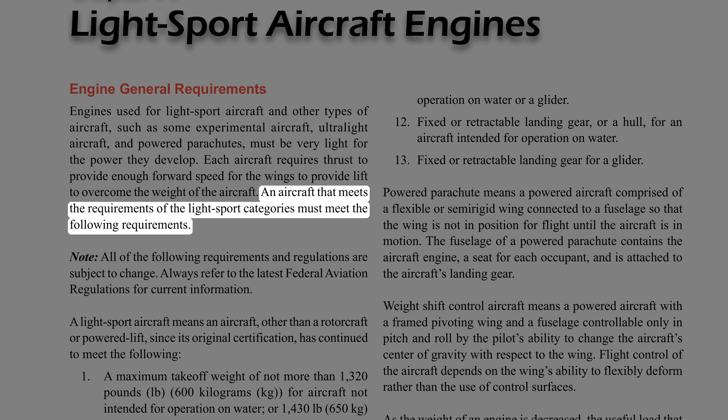Engine General Requirements. Engines used for light sport aircraft and other types of aircraft, such as some experimental aircraft, ultralight aircraft, and powered parachutes, must be very light for the power they develop. Each aircraft requires thrust to provide enough forward speed for the wings to provide lift to overcome the weight of the aircraft. An aircraft that meets the requirements of the light sport categories must meet the following requirements.

Note: all of the following requirements and regulations are subject to change. Always refer to the latest federal aviation regulations for current information.

A light sport aircraft means an aircraft, other than a rotorcraft or powered lift, since its original certification, has continued to meet the following. A maximum takeoff weight of not more than 1,320 pounds (600 kilograms) for aircraft not intended for operation on water, or 1,430 pounds (650 kilograms) for an aircraft intended for operation on water.

A maximum airspeed in level flight with maximum continuous power, VH, of not more than 120 knots calibrated airspeed (CAS), under standard atmospheric conditions at sea level. A maximum never exceed speed, VNE, of not more than 120 knots CAS for a glider. A maximum stalling speed or minimum steady flight speed without the use of lift-enhancing devices, VS1, of not more than 45 knots CAS at the aircraft's maximum certificated takeoff weight and most critical center of gravity.

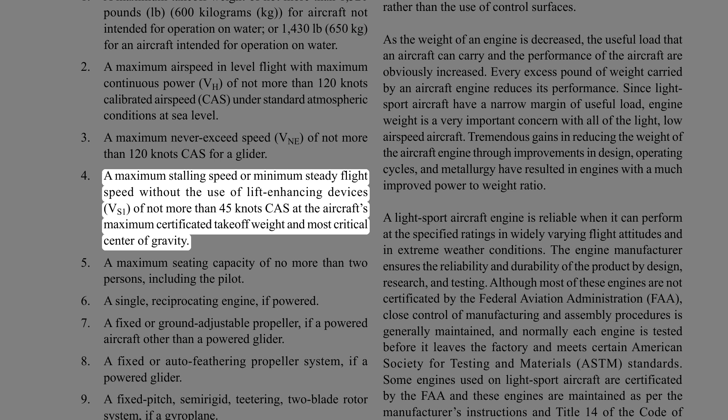A maximum seating capacity of no more than 2 persons, including the pilot. A single, reciprocating engine, if powered. A fixed or ground-adjustable propeller, if a powered aircraft other than a powered glider. A fixed or auto-feathering propeller system, if a powered glider. A fixed pitch, semi-rigid, teetering, 2-blade rotor system, if a gyroplane.

A non-pressurized cabin, if equipped with a cabin. Fixed landing gear, except for an aircraft intended for operation on water or a glider. Fixed or retractable landing gear, or a hull, for an aircraft intended for operation on water. Fixed or retractable landing gear for a glider.

Powered parachute means a powered aircraft comprised of a flexible or semi-rigid wing connected to a fuselage so that the wing is not in position for flight until the aircraft is in motion. The fuselage of a powered parachute contains the aircraft engine, a seat for each occupant, and is attached to the aircraft's landing gear.

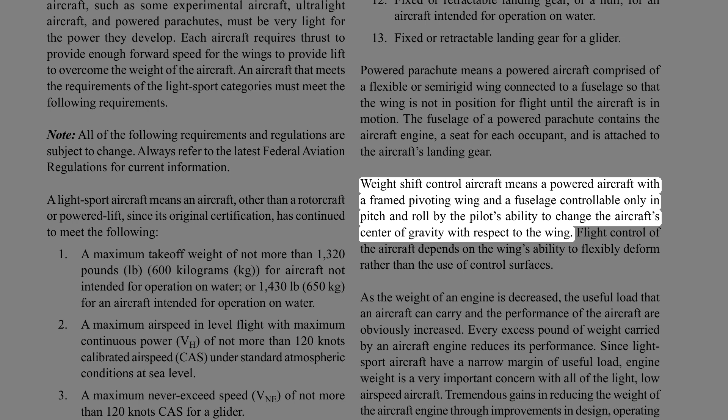Weight shift control aircraft means a powered aircraft with a framed pivoting wing and a fuselage controllable only in pitch and roll by the pilot's ability to change the aircraft's center of gravity with respect to the wing. Flight control of the aircraft depends on the wing's ability to flexibly deform rather than the use of control surfaces.

As the weight of an engine is decreased, the useful load that an aircraft can carry and the performance of the aircraft are obviously increased. Every excess pound of weight carried by an aircraft engine reduces its performance. Since light sport aircraft have a narrow margin of useful load, engine weight is a very important concern with all of the light, low airspeed aircraft.

Tremendous gains in reducing the weight of the aircraft engine through improvements in design, operating cycles, and metallurgy have resulted in engines with a much improved power-to-weight ratio.

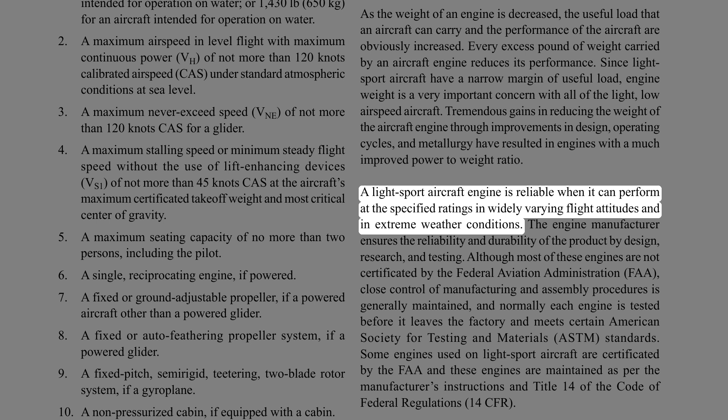A light sport aircraft engine is reliable when it can perform at the specified ratings in widely varying flight attitudes and in extreme weather conditions. The engine manufacturer ensures the reliability and durability of the product by design, research, and testing.

Although most of these engines are not certificated by the Federal Aviation Administration (FAA), close control of manufacturing and assembly procedures is generally maintained, and normally each engine is tested before it leaves the factory and meets certain American Society for Testing and Materials (ASTM) standards. Some engines used on light sport aircraft are certificated by the FAA, and these engines are maintained as per the manufacturer's instructions and Title 14 of the Code of Federal Regulations (14 CFR).

Most light sport engines require a definite time interval between overhauls. This is specified or implied by the engine manufacturer. The time between overhauls (TBO) varies with the type of engine, cycle, operating conditions such as engine temperatures, amount of time the engine is operated at high power settings, and the maintenance received. After reaching the time limit, the engine has to be overhauled. Sometimes this requires the engine to be shipped to an authorized manufacturer's overhaul facility.

One consideration when selecting a light sport engine is the shape, size, and number of cylinders of the engine. Since these engines range from single-cylinder to multi-cylinder engines, the mounting in the airframe is important to maintain the view of the pilot, aircraft center of gravity, and to reduce aircraft drag.

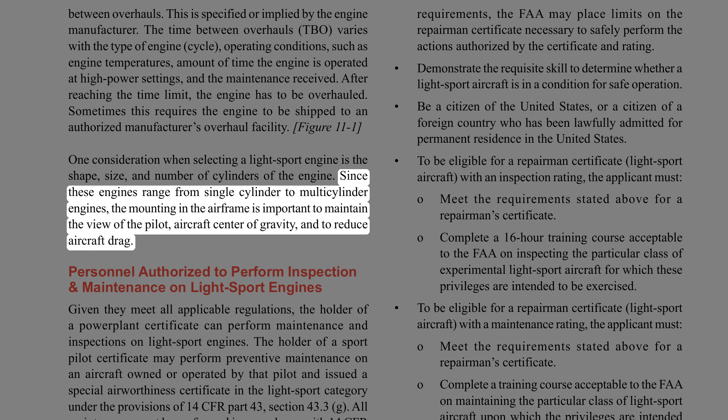Personnel authorized to perform inspection and maintenance on light sport engines: given they meet all applicable regulations, the holder of a Powerplant certificate can perform maintenance and inspections on light sport engines.

The holder of a Sport Pilot certificate may perform preventive maintenance on an aircraft owned or operated by that pilot and issued a special airworthiness certificate in the light sport category under the provisions of 14 CFR Part 43, Section 43.3, G. All maintenance must be performed in accordance with 14 CFR Part 65, Section 65.81, which describes specific experience requirements and current instructions for performing maintenance.

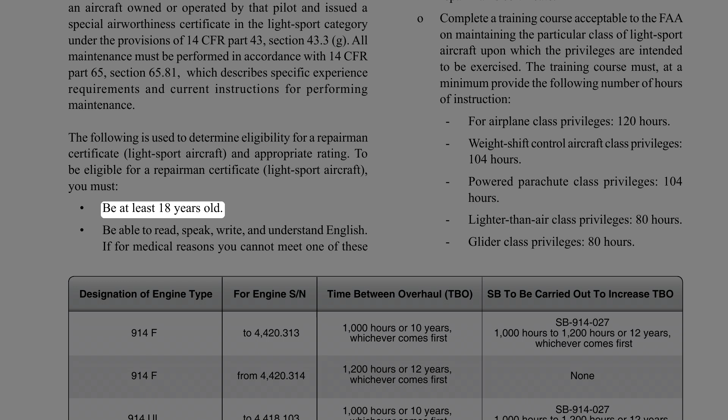The following is used to determine eligibility for a repairman certificate, light sport aircraft, and appropriate rating. To be eligible, you must be at least 18 years old, and be able to read, speak, write, and understand English. If for medical reasons you cannot meet one of these requirements, the FAA may place limits on the repairman certificate necessary to safely perform the actions authorized by the certificate and rating.

Demonstrate the requisite skill to determine whether a light sport aircraft is in a condition for safe operation. Be a citizen of the United States, or a citizen of a foreign country who has been lawfully admitted for permanent residence in the United States.

To be eligible for a repairman certificate, light sport aircraft, with an inspection rating, the applicant must meet the requirements stated above for a repairman's certificate, and complete a 16-hour training course acceptable to the FAA on inspecting the particular class of experimental light sport aircraft for which these privileges are intended to be exercised.

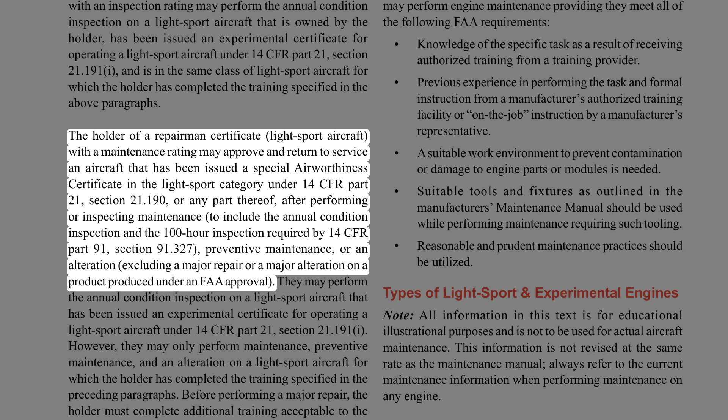The holder of a repairman certificate, light sport aircraft, with a maintenance rating may approve and return to service an aircraft that has been issued a special airworthiness certificate in the light sport category under 14 CFR Part 21, Section 21.190, or any part thereof, after performing or inspecting maintenance, to include the annual condition inspection and the 100-hour inspection required by 14 CFR Part 91, Section 91.327, preventive maintenance, or an alteration, excluding a major repair or a major alteration on a product produced under an FAA approval.

They may perform the annual condition inspection on a light sport aircraft that has been issued an experimental certificate for operating a light sport aircraft under 14 CFR Part 21, Section 21.191, I. However, they may only perform maintenance, preventive maintenance, and an alteration on a light sport aircraft for which the holder has completed the training specified in the preceding paragraphs.

Before performing a major repair, the holder must complete additional training acceptable to the FAA and appropriate to the repair performed. The holder of a repairman certificate, light sport aircraft, with a maintenance rating may not approve for return to service any aircraft or part thereof unless that person has previously performed the work concerned satisfactorily.

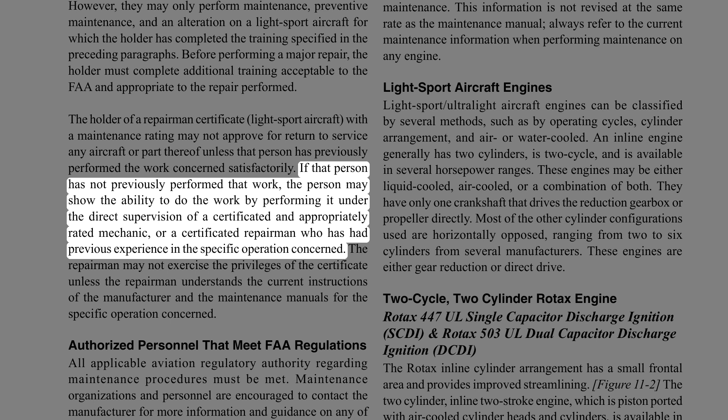If that person has not previously performed that work, the person may show the ability to do the work by performing it under the direct supervision of a certificated and appropriately rated mechanic, or a certificated repairman who has had previous experience in the specific operation concerned. The repairman may not exercise the privileges of the certificate unless the repairman understands the current instructions of the manufacturer and the maintenance manuals for the specific operation concerned.

Authorized personnel must meet FAA regulations. All applicable aviation regulatory authority regarding maintenance procedures must be met. Maintenance organizations and personnel are encouraged to contact the manufacturer for more information and guidance on any of the maintenance procedures. It is a requirement that every individual or maintenance provider possess the required special tooling, training, or experience to perform all tasks outlined.

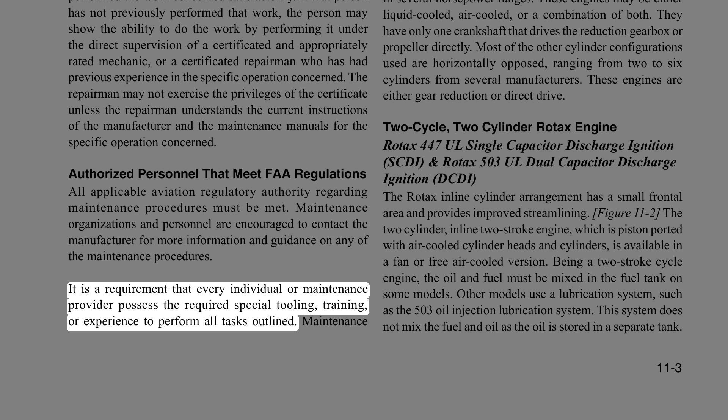Providers that meet the following conditions may perform engine maintenance providing they meet all of the following FAA requirements: knowledge of the specific task as a result of receiving authorized training from a training provider; previous experience in performing the task and formal instruction from a manufacturer's authorized training facility or on-the-job instruction by a manufacturer's representative; a suitable work environment to prevent contamination or damage to engine parts or modules; suitable tools and fixtures as outlined in the manufacturer's maintenance manual; and reasonable and prudent maintenance practices should be utilized.

Types of light sport and experimental engines.

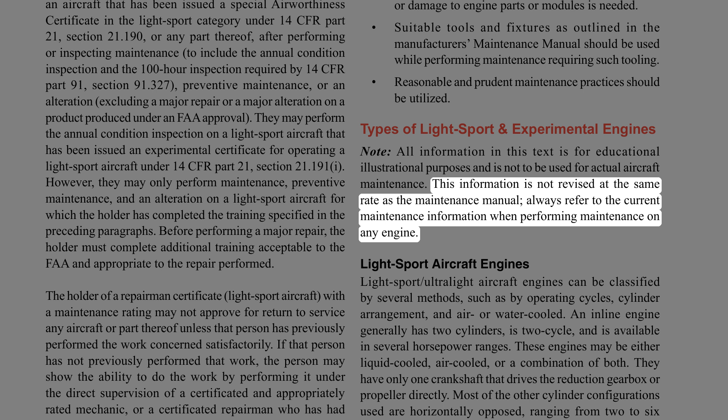Light sport aircraft engines. Light sport and ultralight aircraft engines can be classified by several methods, such as by operating cycles, cylinder arrangement, and air or water-cooled.

An inline engine generally has 2 cylinders, is 2-cycle, and is available in several horsepower ranges. These engines may be either liquid-cooled, air-cooled, or a combination of both. They have only one crankshaft that drives the reduction gearbox or propeller directly.

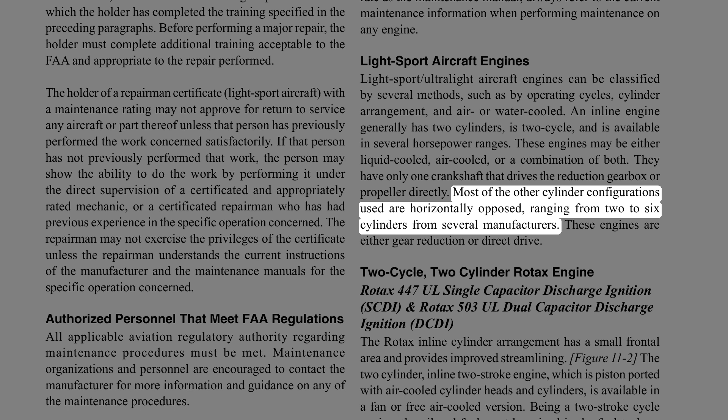Most of the other cylinder configurations used are horizontally opposed, ranging from 2 to 6 cylinders from several manufacturers. These engines are either gear reduction or direct drive.

2-cycle, 2-cylinder Rotax engine: Rotax 447 UL single capacitor discharge ignition (SCDI), and Rotax 503 UL dual capacitor discharge ignition (DCDI). The Rotax inline cylinder arrangement has a small frontal area and provides improved streamlining.

The 2-cylinder, inline 2-stroke engine, which is piston-ported with air-cooled cylinder heads and cylinders, is available in a fan or free air-cooled version. Being a 2-stroke cycle engine, the oil and fuel must be mixed in the fuel tank on some models.

Other models use a lubrication system, such as the 503 oil injection lubrication system. This system does not mix the fuel and oil, as the oil is stored in a separate tank. As the engine needs lubrication, the oil is injected directly from this tank.

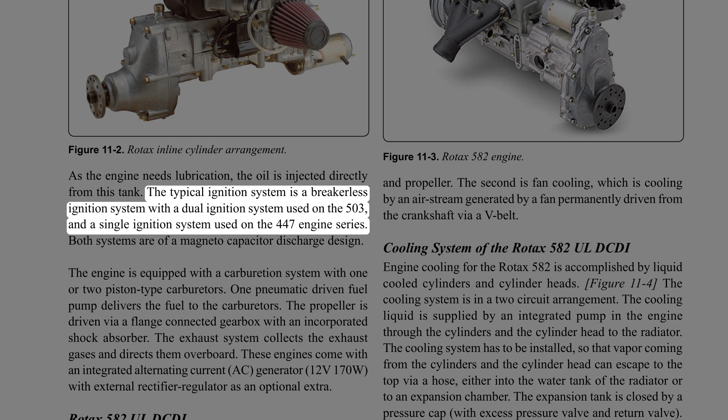The typical ignition system is a breakerless ignition system, with a dual ignition system used on the 503, and a single ignition system used on the 447 engine series. Both systems are of a magneto-capacitor discharge design.

The engine is equipped with a carburation system with 1 or 2 piston-type carburetors. One pneumatic-driven fuel pump delivers the fuel to the carburetors. The propeller is driven via a flange-connected gearbox with an incorporated shock absorber.

The exhaust system collects the exhaust gases and directs them overboard. These engines come with an integrated alternating current (AC) generator, 12V 170W, with an external rectifier regulator as an optional extra.

Rotax 582 UL DCDI. The Rotax 582 is a 2-stroke engine, 2-cylinder inline with rotary valve inlet, has liquid-cooled cylinder heads and cylinders that use an integrated water pump.

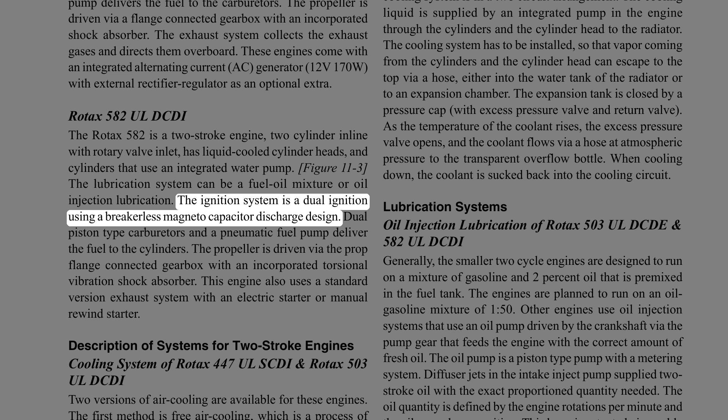The lubrication system can be a fuel oil mixture or oil injection lubrication. The ignition system is a dual ignition using a breakerless magneto-capacitor discharge design. Dual piston-type carburetors and a pneumatic fuel pump deliver the fuel to the cylinders.

The propeller is driven via the prop flange-connected gearbox with an incorporated torsional vibration shock absorber. This engine also uses a standard version exhaust system with an electric starter or manual rewind starter.

Description of systems for 2-stroke engines. Cooling system of Rotax 447 UL SCDI and Rotax 503 UL DCDI. 2 versions of air cooling are available for these engines.

The first method is free air cooling, which is a process of engine cooling by an airstream generated by aircraft speed and propeller. The second is fan cooling, which is cooling by an airstream generated by a fan permanently driven from the crankshaft via a V-belt.

Cooling system of the Rotax 582 UL DCDI. Engine cooling for the Rotax 582 is accomplished by liquid-cooled cylinders and cylinder heads. The cooling system is in a 2-circuit arrangement.

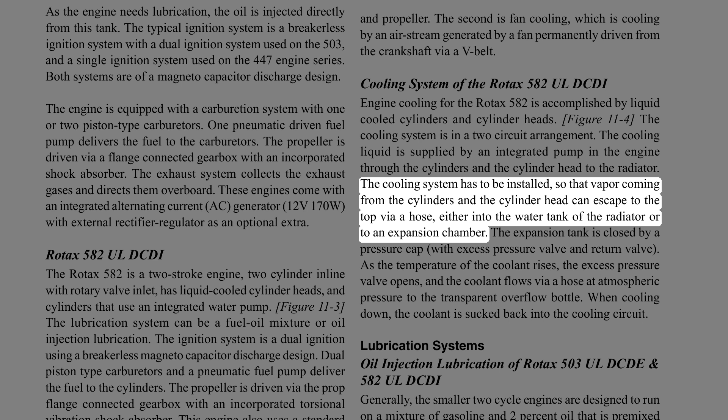The cooling liquid is supplied by an integrated pump in the engine through the cylinders and the cylinder head to the radiator. The cooling system has to be installed so that vapor coming from the cylinders and the cylinder head can escape to the top via a hose, either into the water tank of the radiator or to an expansion chamber. The expansion tank is closed by a pressure cap, with excess pressure valve and return valve.

As the temperature of the coolant rises, the excess pressure valve opens, and the coolant flows via hose at atmospheric pressure to the transparent overflow bottle. When cooling down, the coolant is sucked back into the cooling circuit.

Lubrication systems. Oil injection lubrication of Rotax 503 UL DCDI and 582 UL DCDI. Generally, the smaller 2-cycle engines are designed to run on a mixture of gasoline and 2% oil that is pre-mixed in the fuel tank. The engines are planned to run on an oil-gasoline mixture of 1:50.

Other engines use oil injection systems that use an oil pump driven by the crankshaft via the pump gear that feeds the engine with the correct amount of fresh oil. The oil pump is a piston-type pump with a metering system.

Diffuser jets in the intake inject pump-supplied two-stroke oil with the exact proportion quantity needed. The oil quantity is defined by the engine rotations per minute and the oil pump lever position. This lever is actuated via a cable connected to the throttle cable.

The oil comes to the pump from an oil tank by gravity. Note: in engines that use oil injection, the carburetors are fed with pure gasoline, not an oil-gasoline mixture.

The oil quantity in the oil tank must be checked before putting the engine into service, as the oil is consumed during operation and needs to be replenished.

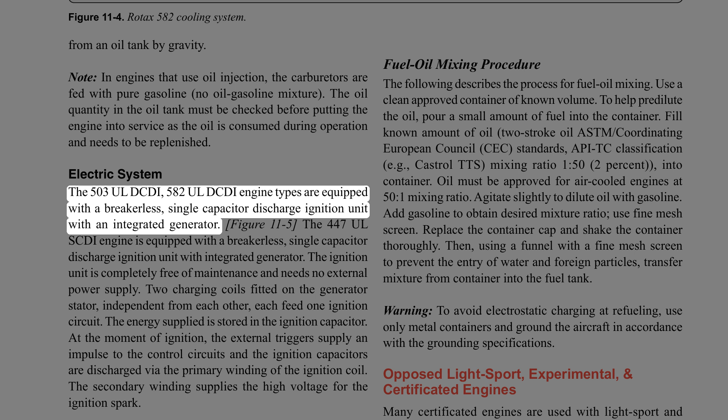Electric system. The 503 UL DCDI and 582 UL DCDI engine types are equipped with a breakerless, single capacitor discharge ignition unit with an integrated generator. The 447 UL SCDI engine is equipped with a breakerless, single capacitor discharge ignition unit with integrated generator.

The ignition unit is completely free of maintenance and needs no external power supply. Two charging coils fitted on the generator stator, independent from each other, each feed one ignition circuit. The energy supplied is stored in the ignition capacitor. At the moment of ignition, the external triggers supply an impulse to the control circuits and the ignition capacitors are discharged via the primary winding of the ignition coil. The secondary winding supplies the high voltage for the ignition spark.

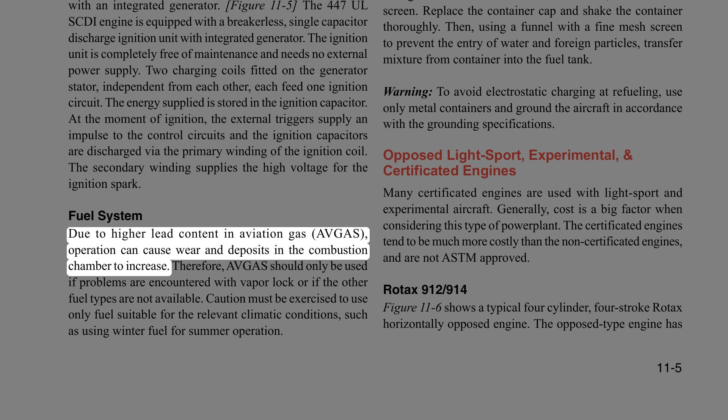Fuel system. Due to higher lead content in aviation gas, avgas operation can cause wear and deposits in the combustion chamber to increase. Therefore, avgas should only be used if problems are encountered with vapor lock or if the other fuel types are not available. Caution must be exercised to use only fuel suitable for the relevant climatic conditions, such as using winter fuel for summer operation.

Fuel oil mixing procedure. The following describes the process for fuel oil mixing. Use a clean approved container of known volume. To help predilute the oil, pour a small amount of fuel into the container. Fill a known amount of oil, two-stroke oil meeting ASTM, Coordinating European Council (CEC), and API TC classification standards, e.g., Castrol TTS, mixing ratio 1:50, 2 percent, into the container. Oil must be approved for air-cooled engines at a 50:1 mixing ratio.

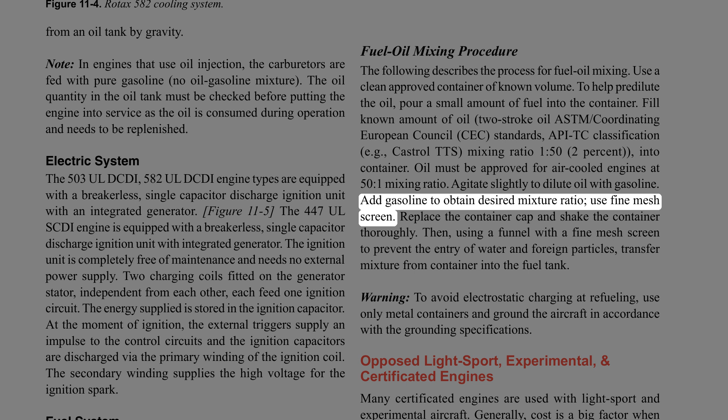Agitate slightly to dilute oil with gasoline. Add gasoline to obtain the desired mixture ratio. Replace the container cap and shake the container thoroughly. Then, using a funnel with a fine mesh screen to prevent the entry of water and foreign particles, transfer the mixture from the container into the fuel tank.

Warning: to avoid electrostatic charging at refueling, use only metal containers and ground the aircraft in accordance with the grounding specifications. Opposed light sport, experimental, and certificated engines.

Many certificated engines are used with light sport and experimental aircraft. Generally, cost is a big factor when considering this type of power plant. The certificated engines tend to be much more costly than the non-certificated engines, and are not ASTM approved.

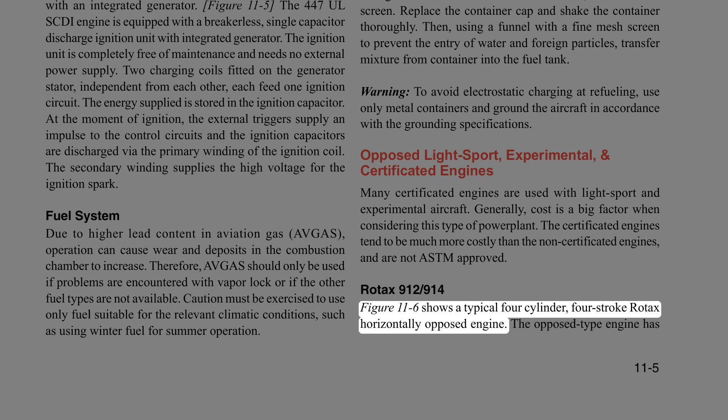Rotax 912-914. Figure 11-6 shows a typical 4-cylinder, 4-stroke Rotax horizontally opposed engine.

The opposed type engine has two banks of cylinders directly opposite each other with a crankshaft in the center. The pistons of both cylinder banks are connected to the single crankshaft. The engine cylinder heads are both liquid-cooled and air-cooled. The air cooling is mostly used on the cylinder. It is generally mounted with the cylinders in a horizontal position.

The opposed type engine has a low weight to horsepower ratio, and its narrow silhouette makes it ideal for horizontal installation on the aircraft wings, for twin-engine applications. Another advantage is its low vibration characteristics. It is an ideal replacement for the Rotax 582 2-cylinder, 2-stroke engine, which powers many of the existing light aircraft, as it is the same weight as the Rotax 582.

These engines are ASTM approved for installation into light sport category aircraft, with some models being FAA certificated engines. Description of systems. Cooling system.

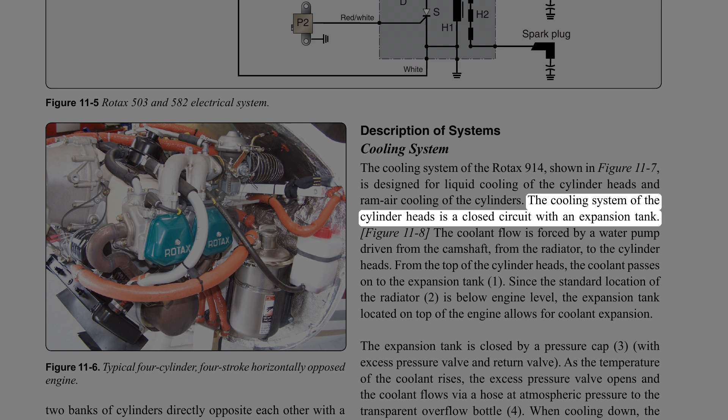The cooling system of the Rotax 914, shown in Figure 11-7, is designed for liquid cooling of the cylinder heads and ram air cooling of the cylinders. The cooling system of the cylinder heads is a closed circuit with an expansion tank. The coolant flow is forced by a water pump driven from the camshaft, from the radiator, to the cylinder heads. From the top of the cylinder heads, the coolant passes on to the expansion tank.

Since the standard location of the radiator (2) is below engine level, the expansion tank located on top of the engine allows for coolant expansion. The expansion tank is closed by a pressure cap (3) with excess pressure valve and return valve.

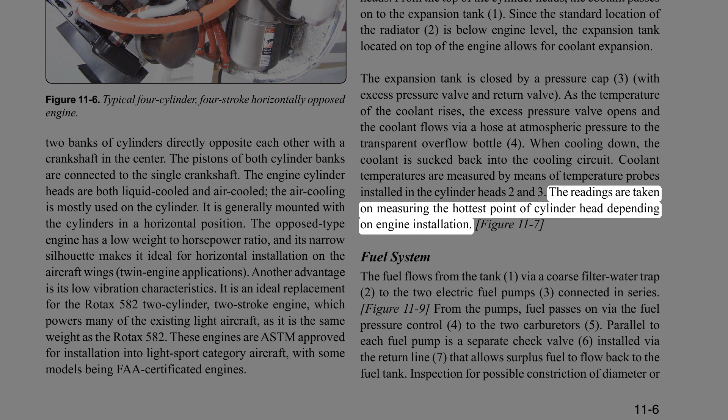As the temperature of the coolant rises, the excess pressure valve opens and the coolant flows via hose at atmospheric pressure to the transparent overflow bottle (4). When cooling down, the coolant is sucked back into the cooling circuit. Coolant temperatures are measured by means of temperature probes installed in the cylinder heads (2 and 3). The readings are taken measuring the hottest point of the cylinder head, depending on engine installation.

Fuel system. The fuel flows from the tank (1), via a coarse filter water trap (2), to the 2 electric fuel pumps (3), connected in series. From the pumps, fuel passes on via the fuel pressure control (4) to the 2 carburetors (5). Parallel to each fuel pump is a separate check valve (6), installed via the return line (7), that allows surplus fuel to flow back to the fuel tank.

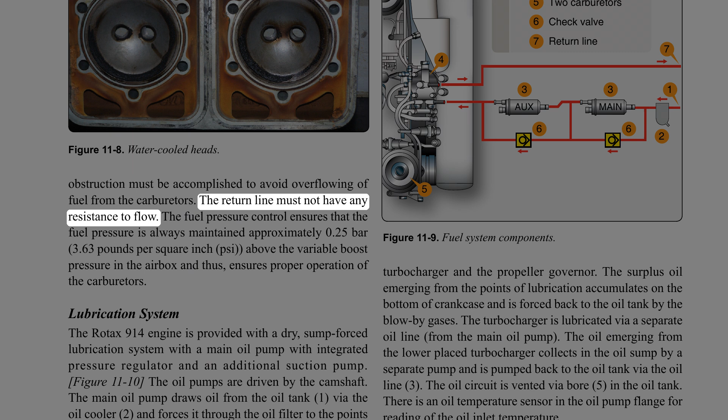Inspection for possible constriction of diameter or obstruction must be accomplished to avoid overflowing of fuel from the carburetors. The return line must not have any resistance to flow. The fuel pressure control ensures that the fuel pressure is always maintained approximately 0.25 bars, 3.63 psi, above the variable boost pressure in the airbox, thus ensuring proper operation of the carburetors.

Lubrication system: The Rotax 914 engine is provided with a dry-sump forced lubrication system with a main oil pump with an integrated pressure regulator and an additional suction pump. The oil pumps are driven by the camshaft. The main oil pump draws oil from the oil tank via the oil cooler and forces it through the oil filter to the points of lubrication. It also lubricates the plain bearings of the turbocharger and the propeller governor.

The surplus oil emerging from the points of lubrication accumulates on the bottom of the crankcase and is forced back to the oil tank by the blow-by gases. The turbocharger is lubricated via a separate oil line from the main oil pump. The oil emerging from the lower-placed turbocharger collects in the oil sump, is drawn by a separate pump, and is pumped back to the oil tank via the oil line. The oil circuit is vented via a bore in the oil tank. There is an oil temperature sensor in the oil pump flange for reading the oil inlet temperature.

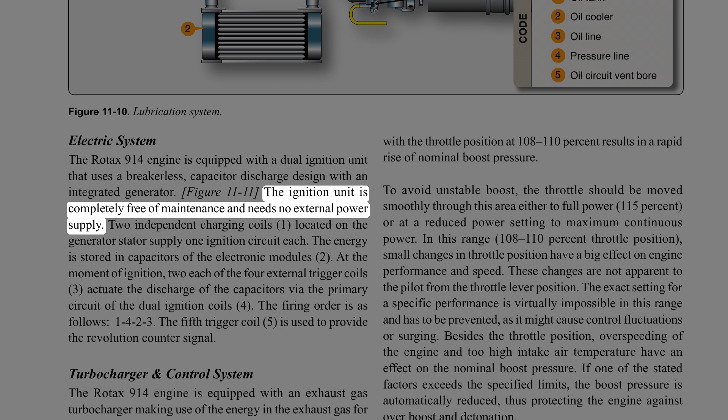Electric system: The Rotax 914 engine is equipped with a dual ignition unit that uses a breakerless, capacitor discharge design with an integrated generator. The ignition unit is completely free of maintenance and needs no external power supply. Two independent charging coils located on the generator stator supply one ignition circuit each. The energy is stored in capacitors of the electronic modules.

At the moment of ignition, two of the four external trigger coils actuate the discharge of the capacitors via the primary circuit of the dual ignition coils. The firing order is 1, 4, 2, 3. The 5th trigger coil is used to provide the revolution counter signal.

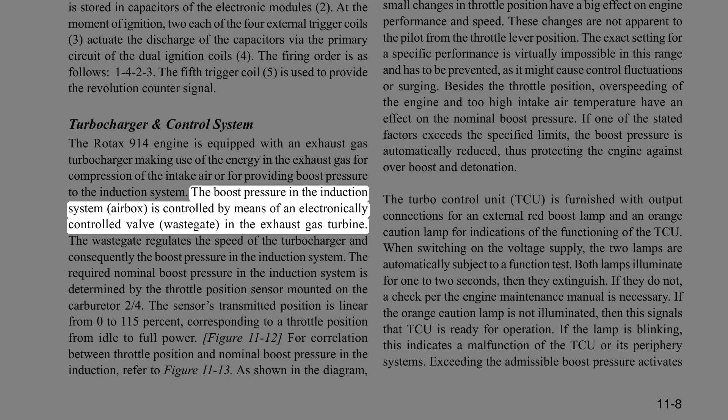Turbocharger and control system: The Rotax 914 engine is equipped with an exhaust gas turbocharger, making use of the energy in the exhaust gas for compression of the intake air or for providing boost pressure to the induction system. The boost pressure in the induction system, airbox, is controlled by means of an electronically controlled valve, the wastegate, in the exhaust gas turbine. The wastegate regulates the speed of the turbocharger and consequently the boost pressure in the induction system.

The required nominal boost pressure in the induction system is determined by the throttle position sensor mounted on the carburetor 2/4. The sensor's transmitted position is linear from 0 to 115%, corresponding to a throttle position from idle to full power. For correlation between throttle position and nominal boost pressure in the induction, refer to figure 11-13.

As shown in the diagram, with the throttle position at 108 to 110%, there is a rapid rise of nominal boost pressure. To avoid unstable boost, the throttle should be moved smoothly through this area, either to full power at 115%, or at a reduced power setting to maximum continuous power.

In this range, 108 to 110% throttle position, small changes in throttle position have a big effect on engine performance and speed. These changes are not apparent to the pilot from the throttle lever position. The exact setting for a specific performance is virtually impossible in this range and has to be prevented, as it might cause control fluctuations or surging.

Besides the throttle position, overspeeding of the engine and too high intake air temperature have an effect on the nominal boost pressure. If one of the stated factors exceeds the specified limits, the boost pressure is automatically reduced, thus protecting the engine against overboost and detonation.

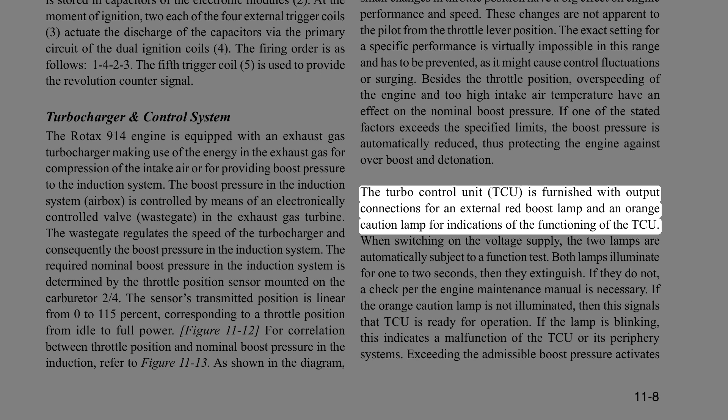The Turbo Control Unit, TCU, is furnished with output connections for an external red boost lamp and an orange caution lamp for indications of the functioning of the TCU. When switching on the voltage supply, the two lamps are automatically subject to a function test. Both lamps illuminate for 1 to 2 seconds, then they extinguish. If they do not, a check per the engine maintenance manual is necessary.

If the orange caution lamp is not illuminated, this signals that the TCU is ready for operation. If the lamp is blinking, this indicates a malfunction of the TCU or its periphery systems. Exceeding the admissible boost pressure activates and illuminates the red boost lamp continuously.

The TCU registers the time of full throttle operation, boost pressure. Full throttle operation for longer than 5 minutes, with the red boost light illuminated, makes the red boost lamp start blinking. The red boost lamp helps the pilot avoid full power operation for longer than 5 minutes, or the engine could be subject to thermal and mechanical overstress.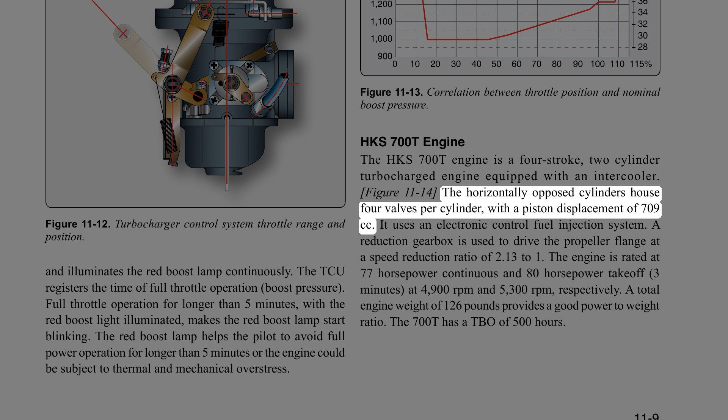The HKS 700T engine is a 4-stroke, 2-cylinder turbocharged engine equipped with an intercooler. The horizontally opposed cylinders house 4 valves per cylinder, with a piston displacement of 709 cc. It uses an electronic control fuel injection system.

A reduction gearbox drives the propeller flange at a speed reduction ratio of 2.13 to 1. The engine is rated at 77 horsepower continuous and 80 horsepower takeoff for 3 minutes, at 4,900 and 5,300 revolutions per minute respectively. A total engine weight of 126 pounds provides a good power-to-weight ratio. The 700T has a TBO of 500 hours.

Jabiru light sport engines are designed to be manufactured using the latest manufacturing techniques. All Jabiru engines are manufactured, assembled, and run on a dynamometer, then calibrated before delivery. The crankcase halves, cylinder heads, crankshaft, starter motor housings, gearbox cover, and the gearbox that powers the distributor rotors, together with many smaller components, are machined from solid material. The sump, or oil pan, is the only casting.

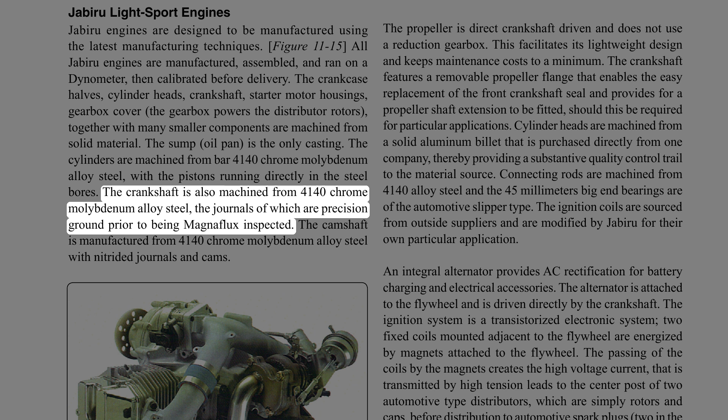The cylinders are machined from 4140 chrome molybdenum alloy steel bar, with the pistons running directly in the steel bores. The crankshaft is also machined from 4140 chrome molybdenum alloy steel, with journals precision ground prior to being Magnaflux inspected. The camshaft is manufactured from 4140 chrome molybdenum alloy steel with nitrided journals and cams.

The propeller is direct crankshaft driven and does not use a reduction gearbox. This facilitates its lightweight design and keeps maintenance costs to a minimum. The crankshaft features a removable propeller flange that enables easy replacement of the front crankshaft seal and allows a propeller shaft extension to be fitted, should this be required for particular applications.

Cylinder heads are machined from a solid aluminum billet purchased directly from one company, providing a substantive quality control trail to the material source. Connecting rods are machined from 4140 alloy steel, and the 45 mm big end bearings are of the automotive slipper type. The ignition coils are sourced from outside suppliers and are modified by Jabiru for their own particular application.

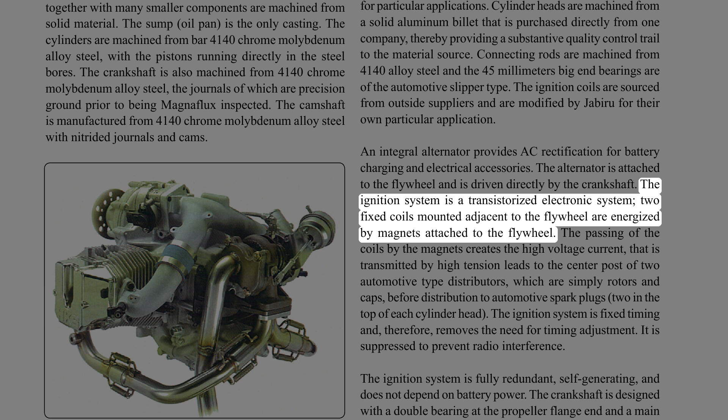An integral alternator provides AC rectification for battery charging and electrical accessories. The alternator is attached to the flywheel and is driven directly by the crankshaft. The ignition system is a transistorized electronic system. Two fixed coils mounted adjacent to the flywheel are energized by magnets attached to the flywheel.

The passing of the coils by the magnets creates the high voltage current that is transmitted by high tension leads to the center post of 2 automotive-type distributors, which are simply rotors and caps, before distribution to automotive spark plugs, 2 in the top of each cylinder head.

The ignition system has fixed timing and therefore removes the need for timing adjustment. It is suppressed to prevent radio interference. The ignition system is fully redundant, self-generating, and does not depend on battery power.

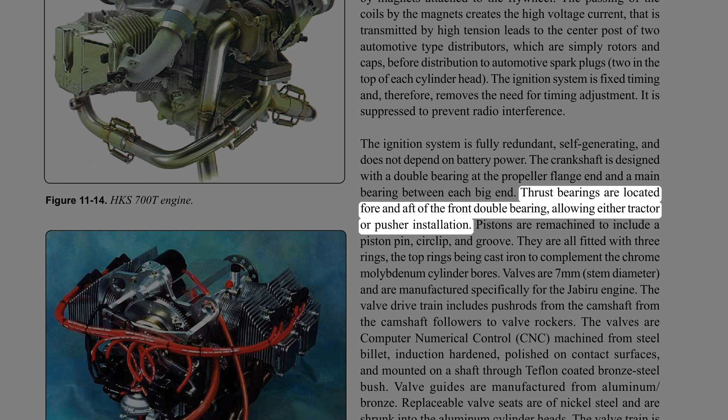The crankshaft is designed with a double bearing at the propeller flange end and a main bearing between each big end. Thrust bearings are located fore and aft of the front double bearing, allowing either tractor or pusher installation. Pistons are machined to include a piston pin, circlip, and groove. They are all fitted with 3 rings, the top rings being cast iron to complement the chrome molybdenum cylinder bores.

Valves are 7 mm stem diameter and are manufactured specifically for the Jabiru engine. The valve drive train includes push rods from the camshaft followers to valve rockers. The valves are CNC machined from steel billet, induction hardened, polished on contact surfaces, and mounted on a shaft through a Teflon-coated bronze steel bush.

Valve guides are manufactured from aluminum bronze. Replaceable valve seats are of nickel steel and are shrunk into the aluminum cylinder heads. The valve train is lubricated from the oil gallery.

Engines use hydraulic lifters that automatically adjust valve clearance. An internal gear pump is driven directly by the camshaft and provides engine lubrication via an oil circuit that includes an automotive spin-on filter, oil cooler, and built-in relief valve.

The standard engines are supplied with 2 ram air cooling ducts developed by Jabiru to facilitate cooling of the engine by directing air from the propeller to the critical areas of the engine, particularly the cylinder heads and barrels. The use of these ducts removes the need to design and manufacture baffles and establish a plenum chamber, which is the traditional method of cooling air-cooled aircraft engines.

The fact that these baffles and plenum chambers are not required also ensures a cleaner engine installation, which in turn facilitates maintenance and inspection of the engine and its components. The engine is fitted with a 1.5 kilowatt starter motor, also manufactured by Jabiru, providing very effective starting. The engine has a very low vibration level; however, it is also supported by 4 large rubber shock mounts attached to the engine mounts at the rear of the engine.

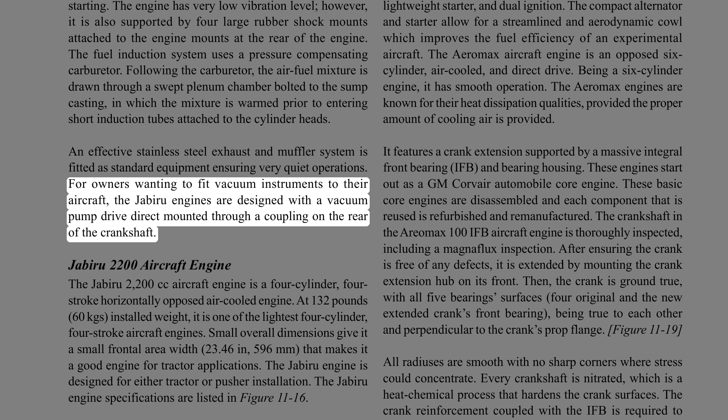Jabiru 2200 aircraft engine. The Jabiru 2200cc aircraft engine is a 4-cylinder, 4-stroke, horizontally opposed, air-cooled engine. At 132 pounds (60 kgs) installed weight, it is one of the lightest 4-cylinder, 4-stroke aircraft engines. Small overall dimensions give it a small frontal area, width 23.46 in (596 mm), making it a good engine for tractor applications. The Jabiru engine is designed for either tractor or pusher installation. The Jabiru engine specifications are listed in Figure 11-16.

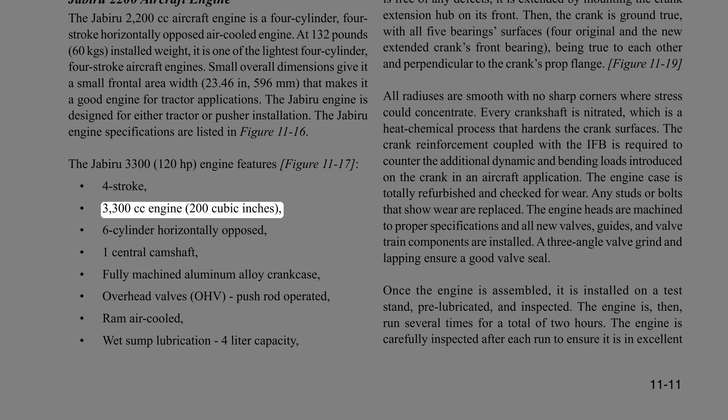The Jabiru 3300, 120 horsepower engine features, Figure 11-17: 4-stroke, 3300cc engine, 200 cubic inches, 6-cylinder horizontally opposed, one central camshaft, fully machined aluminum alloy crankcase, overhead valves (OHV), pushrod operated, ram air-cooled, wet sump lubrication with 4-liter capacity, direct propeller drive, dual transistorized magneto ignition, integrated AC generator, electric starter, mechanical fuel pump, and naturally aspirated, single pressure compensating carburetor.

Aeromax Aviation 100 IFB aircraft engine. Aeromax Aviation produces a version of a 100 horsepower engine called the Integral Front Bearing. The engine features a specially made integral front bearing, Figure 11-18. It uses an integral permanent magnet 35 amp alternator, lightweight starter, and dual ignition. The compact alternator and starter allow for a streamlined and aerodynamic cowl, which improves the fuel efficiency of an experimental aircraft.

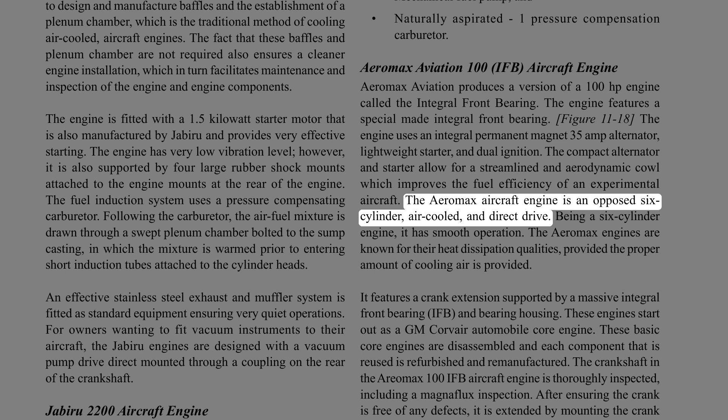The Aeromax aircraft engine is an opposed 6-cylinder, air-cooled, direct drive engine. Being a 6-cylinder engine, it has smooth operation. The Aeromax engines are known for their heat dissipation qualities, provided the proper amount of cooling air is supplied. It features a crank extension supported by a massive Integral Front Bearing (IFB) and bearing housing.

These engines start out as a GM Corvair automobile core engine. These basic core engines are disassembled, and each component that is reused is refurbished and remanufactured. The crankshaft in the Aeromax 100 IFB aircraft engine is thoroughly inspected, including a Magnaflux inspection.

After ensuring the crank is free of any defects, it is extended by mounting the crank extension hub on its front. Then the crank is ground true, with all 5 bearing surfaces - 4 original and the new extended crank's front bearing - true to each other and perpendicular to the crank's prop flange. Figure 11-19. All radiuses are smooth with no sharp corners where stress could concentrate. Every crankshaft is nitrided, a heat chemical process that hardens the crank surfaces. This crank reinforcement, coupled with the IFB, is required to counter the additional dynamic and bending loads introduced on the crank in an aircraft application.

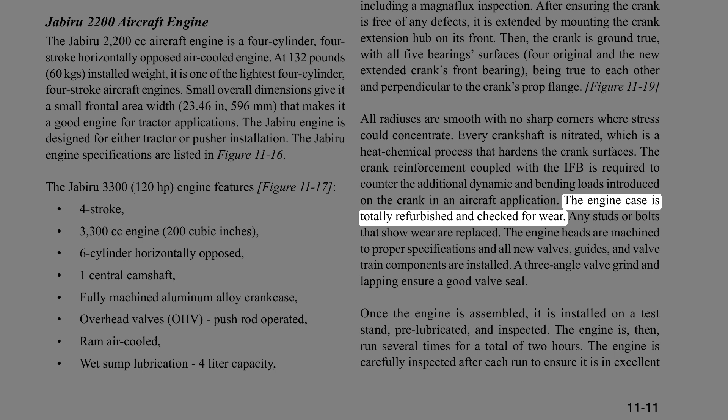The engine case is totally refurbished and checked for wear. Any studs or bolts that show wear are replaced. The engine heads are machined to proper specifications, and all new valves, guides, and valve train components are installed. A 3-angle valve grind and lapping ensure a good valve seal.

Once the engine is assembled, it is installed on a test stand, pre-lubricated, and inspected. The engine is then run several times for a total of 2 hours, carefully inspected after each run to ensure it is in excellent operating condition. At the end of test running, the oil filter is removed and cut for inspection, and its internal condition is recorded. This process is documented and kept on file for each individual engine.

Once the engine's proper performance is assured, it is removed and packaged in a custom-built crate for shipping. Each engine is shipped with its engine service and operations manual, which contains information pertaining to installation, break-in, testing, tune-up, troubleshooting, repair, and inspection procedures. The specifications for the Aeromax 100 engine are outlined in Figure 11-20.

Direct drive VW engines: Revmaster R2300 engine. The Revmaster R2300 engine maintains Revmaster's systems and parts, including its RM049 heads that feature large fins and a hemispherical combustion chamber. It maintains the earlier R2200 engine's top horsepower of 82 at 2,950 RPM continuous. Takeoff power is rated at 85 horsepower at 3,350 RPM.

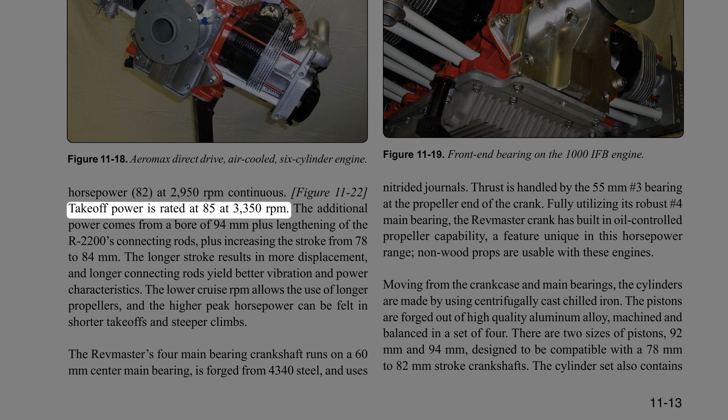The additional power comes from a bore of 94mm, plus lengthening of the R2200's connecting rods, plus increasing the stroke from 78 to 84mm. The longer stroke results in more displacement, and longer connecting rods yield better vibration and power characteristics. The lower cruise RPM allows the use of longer propellers, and the higher peak horsepower can be felt in shorter takeoffs and steeper climbs.

The Revmaster's 4-main bearing crankshaft runs on a 60 mm center main bearing, is forged from 4340 steel, and uses nitrided journals. Thrust is handled by the 55 mm number 3 bearing at the propeller end of the crank.

Fully utilizing its robust number 4 main bearing, the Revmaster crank has built-in oil-controlled propeller capability, a feature unique in this horsepower range. Non-wood props are usable with these engines.

Moving from the crankcase and main bearings, the cylinders are made using centrifugally cast chilled iron. The pistons are forged out of high-quality aluminum alloy, machined and balanced in a set of 4.

There are 2 sizes of pistons, 92 mm and 94 mm, designed to be compatible with 78 mm to 82 mm stroke crankshafts. The cylinder set also contains piston rings, wrist pins, and locks.

The direct drive R2300 uses a dual CDI ignition with 8-coil spark to 8 spark plugs, dual 20-amp alternators, an oil cooler, and its proprietary Rev-Flo carburetor, while introducing longer cylinders that do not require spacers.

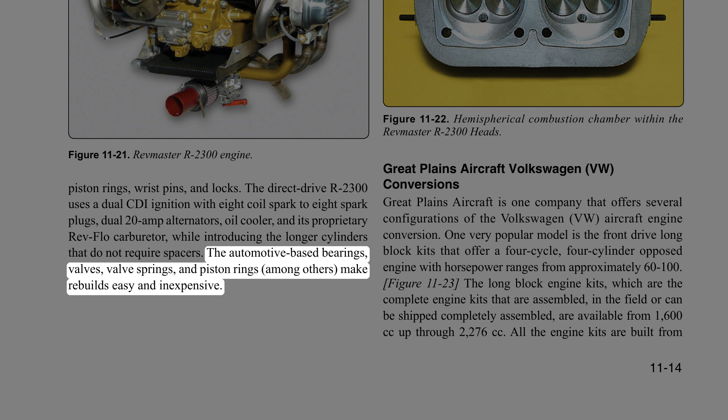The automotive-based bearings, valves, valve springs, and piston rings, among others, make rebuilds easy and inexpensive.

Great Plains Aircraft Volkswagen, VW, conversions.

Great Plains Aircraft is one company that offers several configurations of the Volkswagen, VW, aircraft engine conversion. One very popular model is the front-drive long block kit, offering a 4-cycle, 4-cylinder opposed engine with horsepower ranges from approximately 60 to 100.

The long block engine kits, which are complete engine kits that are assembled in the field or can be shipped completely assembled, are available from 1,600 cc up through 2,276 cc.

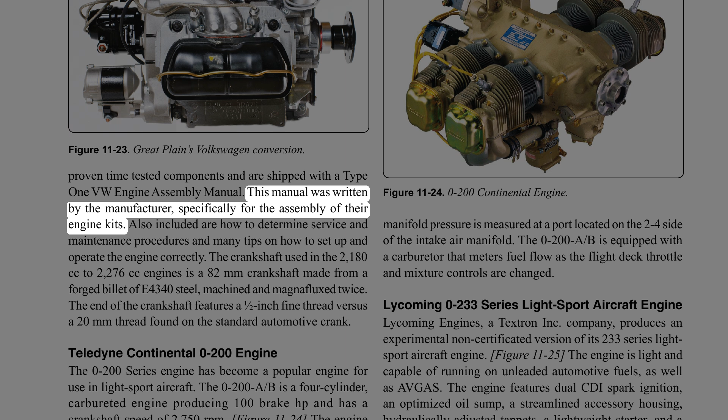All the engine kits are built from proven, time-tested components and are shipped with a Type 1 VW engine assembly manual, written by the manufacturer specifically for the assembly of their engine kits.

Also included are how to determine service and maintenance procedures and many tips on how to set up and operate the engine correctly. The crankshaft used in the 2,180 cc to 2,276 cc engines is an 82 mm crankshaft made from a forged billet of E4340 steel, machined and magnafluxed twice.

The end of the crankshaft features a 1/2 inch fine thread versus a 20 mm thread found on the standard automotive crank.

Teledyne Continental O-200 engine. The O-200 series engine has become a popular engine for use in light sport aircraft. The O-200A/B is a 4-cylinder, carbureted engine producing 100 brake horsepower and has a crankshaft speed of 2,750 revolutions per minute.

The engine has horizontally opposed, air-cooled cylinders with an overhead valve design, with updraft intake inlets and downdraft exhaust outlets mounted on the bottom of the cylinder. The O-200A/B engines have a 201 cubic inch displacement, achieved using a cylinder design with a 4.06 inch diameter bore and a 3.88 inch stroke.

The dry weight of the engine is 170.18 pounds without accessories. The weight of the engine with installed accessories is approximately 215 pounds.

Developed specifically for light aircraft, the O-200D engine has a dry weight with installed accessories of approximately 199 pounds. The engine is provided with 4 integral rear engine mounts. A crankcase breather port is located on the 1 to 3 side of the crankcase, forward of the number 3 cylinder.

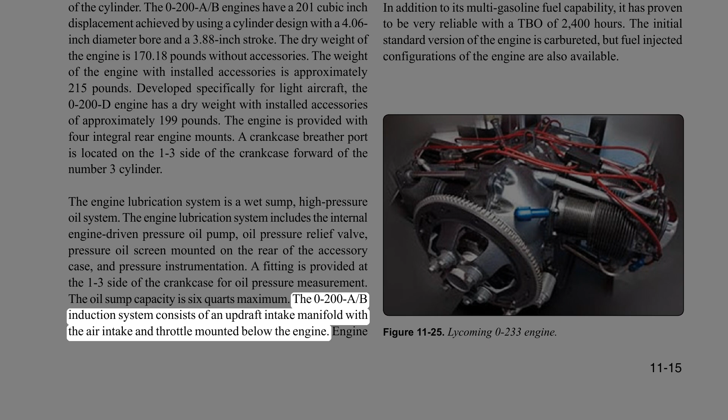The O-200A/B induction system consists of an updraft intake manifold with the air intake and throttle mounted below the engine. Engine manifold pressure is measured at a port located on the 2 to 4 side of the intake air manifold.

The O-200A/B is equipped with a carburetor that meters fuel flow as the flight deck throttle and mixture controls are changed.

Lycoming O-233 series light sport aircraft engine. Lycoming Engines, a Textron Inc. company, produces an experimental, non-certificated version of its 233 series light sport aircraft engine.

The engine is light and capable of running on unleaded automotive fuels, as well as avgas. It features dual CDI spark ignition, an optimized oil sump, a streamlined accessory housing, hydraulically adjusted tappets, a lightweight starter, and a lightweight alternator with integral voltage regulator.

It has a dry weight of 213 pounds, including the fuel pump, and offers continuous power ratings up to 115 horsepower at 2,800 revolutions per minute.

In addition to its multi-gasoline fuel capability, it has proven to be very reliable with a TBO of 2,400 hours. The initial standard version of the engine is carbureted, but fuel-injected configurations are also available.

General maintenance practices on light sport Rotax engines. Some specific maintenance practices that differ from conventional certificated engines are covered for background and educational acquaintance purposes only. Always refer to the current manufacturer's information when performing maintenance on any engine.

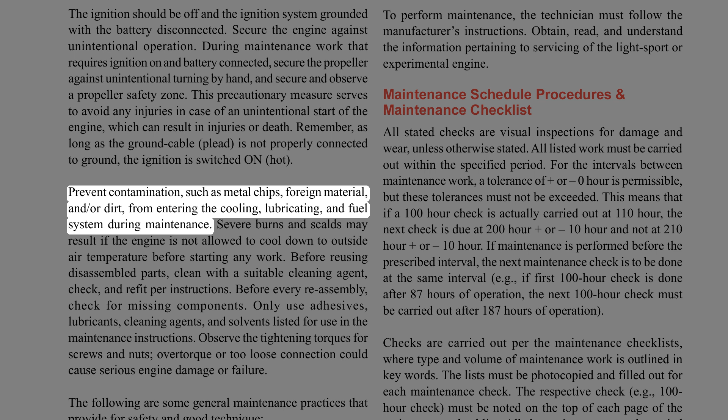Prevent contamination, such as metal chips, foreign material, and/or dirt, from entering the cooling, lubricating, and fuel system during maintenance. Severe burns and scalds may result if the engine is not allowed to cool down to outside air temperature before starting any work.

Before reusing disassembled parts, clean with a suitable cleaning agent, check and refit per instructions. Before every reassembly, check for missing components. Only use adhesives, lubricants, cleaning agents, and solvents listed for use in the maintenance instructions.

Observe the tightening torques for screws and nuts. Overtorque or too loose connection could cause serious engine damage or failure.

The following are some general maintenance practices that provide for safety and good technique. Work only in a non-smoking area and not close to sparks or open flames. Always use the specified tools.

During disassembling and reassembling, the removal of any safety items, e.g., safety wiring or self-locking fastener, must be followed with the replacement of a new one. Once loosened, always replace self-securing locking nuts.

Use clean screws and nuts only and inspect face of nuts and thread for damage. Check the contact faces and threads for damage and replace if any damage is detected. At reassembly of the engine, replace all sealing rings, gaskets, securing elements, O-rings, and oil seals.

At disassembly of the engine, mark the engine's components as necessary to provide for locating the original position of the part. Parts should be replaced in the same position upon reassembly. Any used components have wear patterns that should be replaced or matched if reused. Ensure that these marks are not erased or washed off.

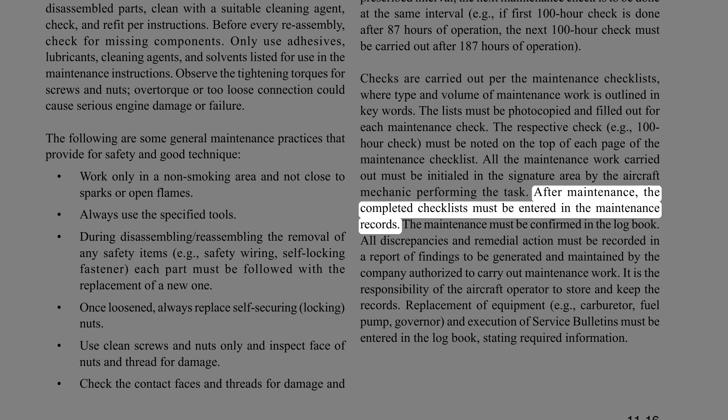All the maintenance work carried out must be initialed in the signature area by the aircraft mechanic performing the task. After maintenance, the completed checklists must be entered in the maintenance records. The maintenance must be confirmed in the logbook.

All discrepancies and remedial action must be recorded in a report of findings to be generated and maintained by the company authorized to carry out maintenance work. It is the responsibility of the aircraft operator to store and keep the records.

Replacement of equipment, e.g., carburetor, fuel pump, governor, and execution of service bulletins must be entered in the logbook, stating required information. Carburetor synchronization: for smooth idling, synchronization of the throttle valves is necessary.

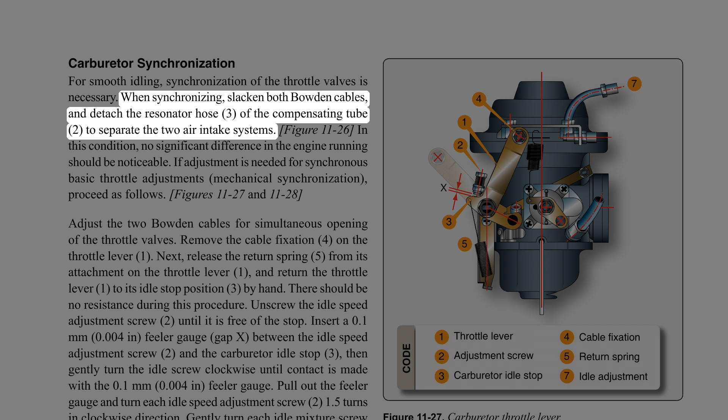When synchronizing, slacken both Bowden cables and detach the resonator hose, item 3, of the compensating tube, item 2, to separate the two air intake systems. In this condition, no significant difference in the engine running should be noticeable.

If adjustment is needed for synchronous basic throttle adjustments, mechanical synchronization, proceed as follows, referring to figures 11-27 and 11-28. Adjust the two Bowden cables for simultaneous opening of the throttle valves.

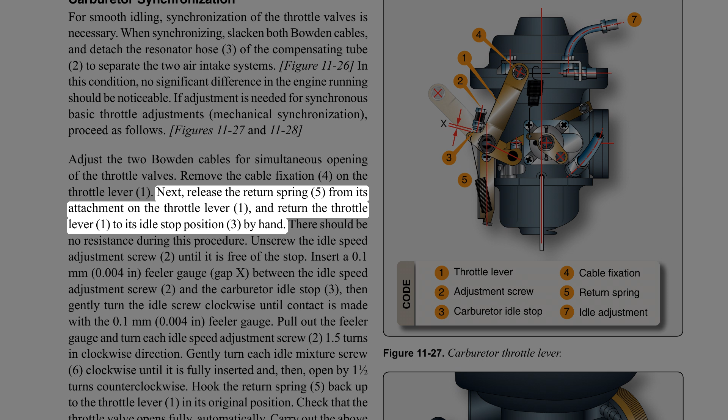Remove the cable fixation, 4, on the throttle lever, 1. Next, release the return spring, 5, from its attachment on the throttle lever, 1, and return the throttle lever, 1, to its idle stop position, 3, by hand. There should be no resistance during this procedure.

Unscrew the idle speed adjustment screw, 2, until it is free of the stop. Insert a 0.1 mm, 0.004 in, feeler gauge, gap X, between the idle speed adjustment screw, 2, and the carburetor idle stop, 3. Then gently turn the idle screw clockwise until contact is made with the feeler gauge. Pull out the feeler gauge and turn each idle speed adjustment screw 1.5 turns clockwise.

Gently turn each idle mixture screw, 6, clockwise until it is fully inserted, then open by 1.5 turns counterclockwise. Hook the return spring, 5, back up to the throttle lever, 1, in its original position. Check that the throttle valve opens fully, automatically. Carry out the above procedure on both carburetors.

Note: the mechanical carburetor synchronization is sufficiently exact.

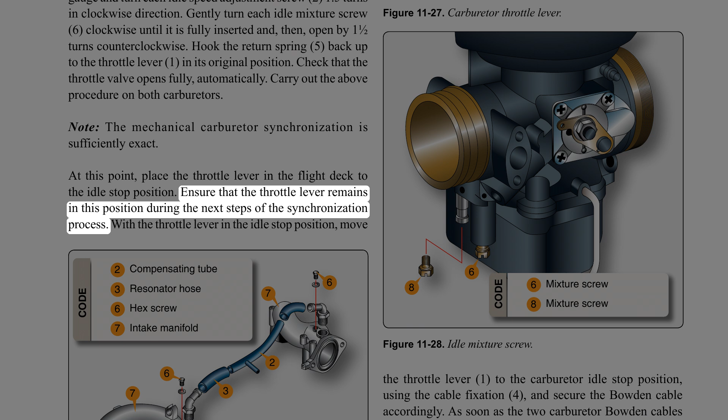At this point, place the throttle lever in the flight deck to the idle stop position. Ensure that the throttle lever remains in this position during the next steps of the synchronization process. With the throttle lever in the idle stop position, move the throttle lever, 1, to the carburetor idle stop position, using the cable fixation, 4, and secure the Bowden cable accordingly.

As soon as the two carburetor Bowden cables are installed with the throttle lever in idle position, check that the idle speed adjustment screw, 2, rests fully on the idle stop, 3, without pressure. Caution: an idle speed that is too low results in gearbox damage, and if an idle speed is too high, the engine is harder to start. Start the engine to verify the idle speed.

If the idle speed is too high or too low, adjust accordingly with idle speed adjustment screw, 2. Check the operational idle mixture of the engine. If necessary, adjust with the idle mixture screw, 6.

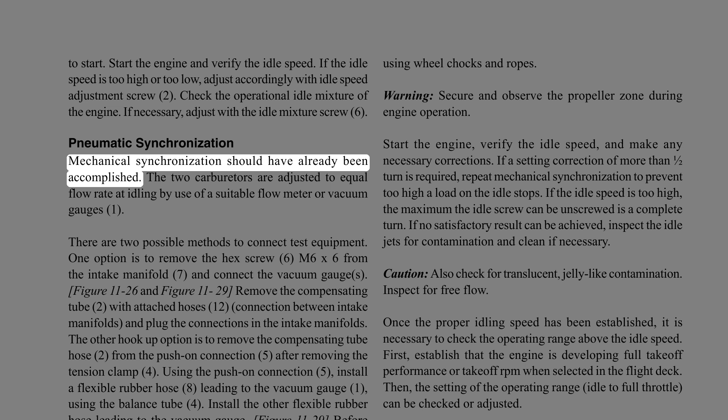Pneumatic synchronization. Mechanical synchronization should have already been accomplished. The two carburetors are adjusted to equal flow rate at idling by use of a suitable flow meter or vacuum gauges, 1. There are two possible methods to connect test equipment.

One option is to remove the hex screw, 6 M6x6, from the intake manifold, 7, and connect the vacuum gauges, Figure 11-26 and Figure 11-29. Remove the compensating tube, 2, with attached hoses, 12, the connection between intake manifolds, and plug the connections in the intake manifolds.

The other hookup option is to remove the compensating tube hose, 2, from the push-on connection, 5, after removing the tension clamp, 4. Using the push-on connection, 5, install a flexible rubber hose, 8, leading to the vacuum gauge, 1. Using the balance tube, 4, install the other flexible rubber hose leading to the vacuum gauge.

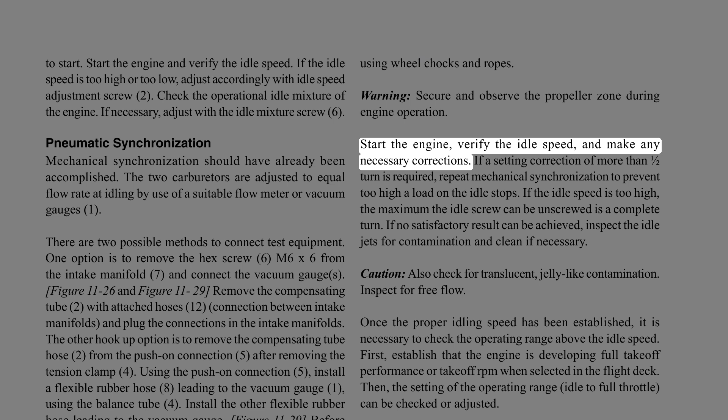Before proceeding any further, secure the aircraft on the ground, using wheel chocks and ropes. Warning: secure and observe the propeller zone during engine operation. Start the engine, verify the idle speed, and make any necessary corrections.

If a setting correction of more than 1/2 turn is required, repeat mechanical synchronization to prevent too high a load on the idle stops. If the idle speed is too high, the maximum the idle screw can be unscrewed is a complete turn. If no satisfactory result can be achieved, inspect the idle jets for contamination and clean if necessary. Caution: also check for translucent, jelly-like contamination. Inspect for free flow.

Once the proper idling speed has been established, it is necessary to check the operating range above the idle speed. First, establish that the engine is developing full takeoff performance or takeoff RPM when selected in the flight deck. Then, the setting of the operating range, idle to full throttle, can be checked or adjusted.

Start and warm up engine as per the operator's manual. Select full power and check that both pressure gauges are registering the same readings. If the same reading is not made on both gauges, shut down the engine and check that carburetor actuation has full travel and that the chokes are in the full off position.

If necessary, modify the carburetor actuation as required to achieve full power on both carburetors. Once full power has been established on both carburetors, retard the throttle and observe the pressure gauge settings. The pressure gauges should show the same reading for both carburetors. Discrepancies must be compensated for by adjusting the off-idle adjustment, 7.

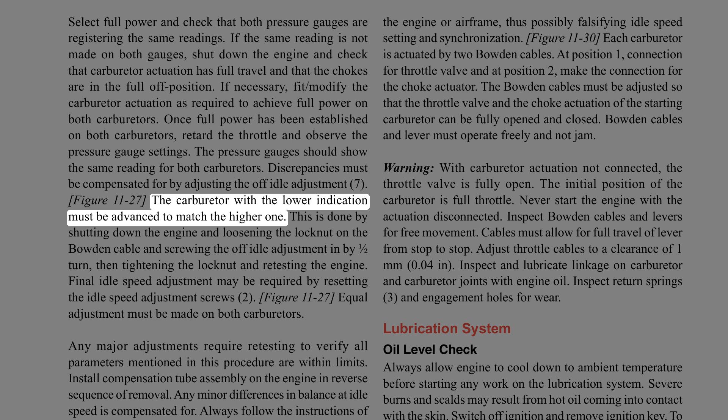The carburetor with the lower indication must be advanced to match the higher one. This is done by shutting down the engine and loosening the lock nut on the Bowden cable and screwing the off-idle adjustment in by 1/2 turn, then tightening the lock nut and retesting the engine. Final idle speed adjustment may be required by resetting the idle speed adjustment screws.

Equal adjustment must be made on both carburetors. Any major adjustments require retesting to verify all parameters mentioned in this procedure are within limits.

Install the compensation tube assembly on the engine in reverse sequence of removal. Any minor differences in balance at idle speed are compensated for. Always follow the instructions of the instrument manufacturer.

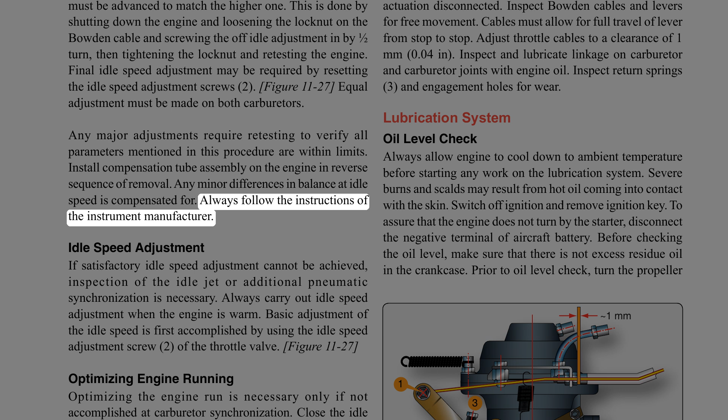Idle speed adjustment: if satisfactory idle speed adjustment cannot be achieved, inspection of the idle jet or additional pneumatic synchronization is necessary. Always carry out idle speed adjustment when the engine is warm. Basic adjustment of the idle speed is first accomplished by using the idle speed adjustment screw, 2, of the throttle valve.

Optimizing engine running is necessary only if not accomplished at carburetor synchronization. Close the idle mixture screw, 6, by turning clockwise to screw in fully, then open again by 1½ turns counterclockwise. Figures 11-27 and 11-28.

Starting from this basic adjustment, the idle mixture screw, 6, is turned until the highest motor speed is reached. The optimum setting is the middle between the two positions at which an RPM drop is noticed. Readjustment of the idle speed is carried out using the idle speed adjustment screw, 2, and, if necessary, by slightly turning the idle mixture screw again.

Turning the idle mixture control screw clockwise results in a leaner mixture, and turning counterclockwise results in a richer mixture. Checking the carburetor actuation.

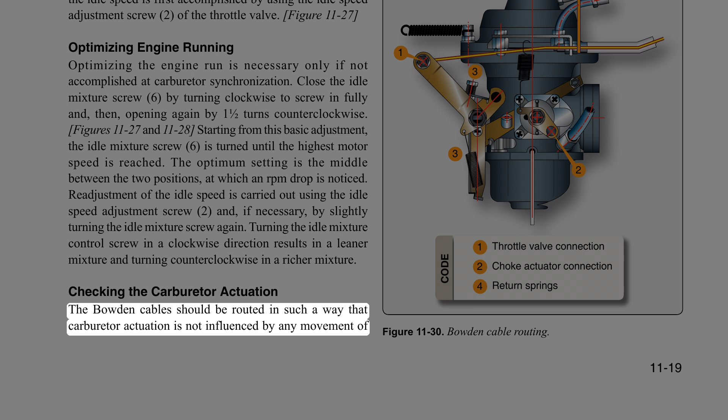The Bowden cable should be routed so that carburetor actuation is not influenced by any movement of the engine or airframe, thus possibly falsifying idle speed setting in synchronization. Each carburetor is actuated by 2 Bowden cables. At position 1, connection for throttle valve, and at position 2, connection for the choke actuator.

The Bowden cables must be adjusted so that the throttle valve and the choke actuation of the starting carburetor can be fully opened and closed. Bowden cables and lever must operate freely and not jam.

Warning: with carburetor actuation not connected, the throttle valve is fully open. The initial position of the carburetor is full throttle. Never start the engine with the actuation disconnected.

Inspect Bowden cables and levers for free movement. Cables must allow for full travel of lever from stop to stop. Adjust throttle cables to a clearance of 1 mm, 0.04 in.

Inspect and lubricate linkage on carburetor and carburetor joints with engine oil. Inspect return springs, 3, and engagement holes for wear.

Lubrication system oil level check. Always allow the engine to cool down to ambient temperature before starting any work on the lubrication system. Severe burns and scalds may result from hot oil coming into contact with the skin.

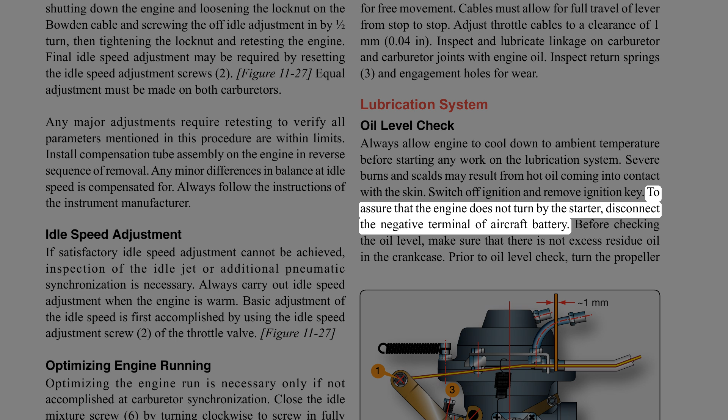Switch off ignition and remove the ignition key. To assure that the engine does not turn by the starter, disconnect the negative terminal of the aircraft battery.

Before checking the oil level, make sure that there is no excess residue oil in the crankcase. Prior to the oil level check, turn the propeller several times by hand in the direction of engine rotation to pump all the oil from the engine to the oil tank.

This process is completed when air flows back to the oil tank. This airflow can be perceived as a gurgling noise when the cap of the oil tank is removed.

The oil level in the oil tank should be between the two marks, maximum and minimum, on the oil dipstick, but must never fall below the minimum mark.

If replenishing oil is required, for longer flights replenish oil to the maximum mark to provide more of an oil reserve. During standard engine operation, the oil level should be midway between the maximum and minimum marks.

A higher oil level means over-servicing. Oil can escape through the venting, or breather, passage.

Oil change: it is advisable to check the oil level prior to an oil change, as it provides information about oil consumption. Run the engine to warm the oil before beginning the procedure.

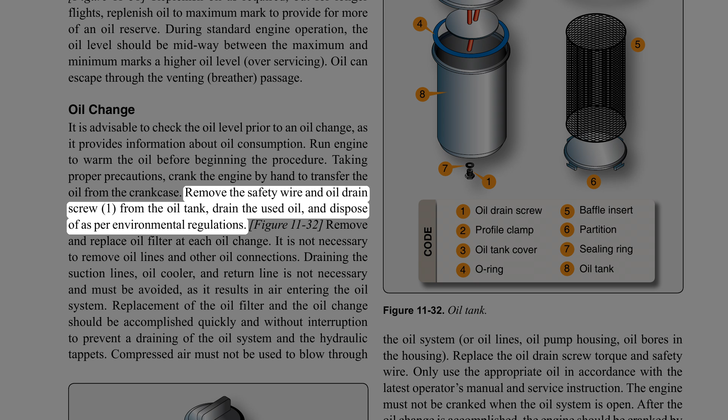Taking proper precautions, crank the engine by hand to transfer the oil from the crankcase. Remove the safety wire and oil drain screw, 1, from the oil tank, drain the used oil, and dispose of it as per environmental regulations. Remove and replace the oil filter at each oil change.

It is not necessary to remove oil lines and other oil connections. Draining the suction lines, oil cooler, and return line is not necessary and must be avoided, as it results in air entering the oil system.

Replacement of the oil filter and the oil change should be accomplished quickly and without interruption to prevent draining of the oil system and the hydraulic tappets.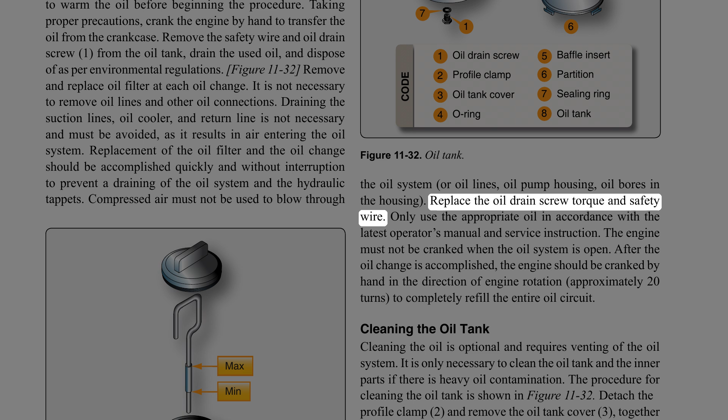Compressed air must not be used to blow through the oil system, oil lines, oil pump housing, or oil bores in the housing. Replace the oil drain screw, torque it, and install the safety wire. Only use the appropriate oil in accordance with the latest operator's manual and service instruction.

The engine must not be cranked when the oil system is open. After the oil change is accomplished, the engine should be cranked by hand in the direction of engine rotation, approximately 20 turns, to completely refill the entire oil circuit.

Cleaning the oil tank is optional and requires venting of the oil system. It is only necessary to clean the oil tank and the inner parts if there is heavy oil contamination. The procedure for cleaning the oil tank is shown in Figure 11 to 32.

Detach the profile clamp, 2, and remove the oil tank cover, 3, together with the O-ring, 4, and the oil lines. Remove the inner parts of the oil tank, such as the baffle insert, 5, and the partition, 6. Clean oil tank, 8, and inner parts, 5, 6, and check for damage. Be aware that incorrect assembly of the oil tank components can cause engine faults or engine damage.

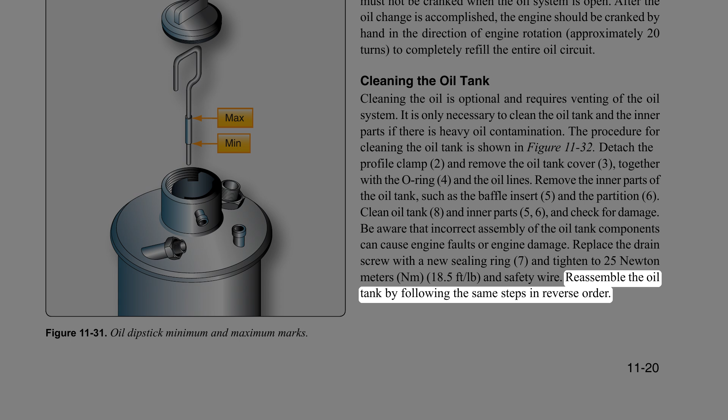Replace the drain screw with a new sealing ring, 7, and tighten to 25 Nm, 18.5 feet per pound, and safety wire. Reassemble the oil tank by following the same steps in reverse order.

Inspecting the magnetic plug. Remove the magnetic plug and inspect it for accumulation of chips. The magnetic plug, torque screw, is located on the crankcase between cylinder 2 and the gearbox. This inspection is important because it allows conclusions to be drawn on the internal condition of the gearbox and engine, and reveals information about possible damage.

If a significant amount of metal chips are detected, the engine must be inspected, repaired, or overhauled. Steel chips in low numbers can be tolerated if the accumulation is below 3 mm, 0.125 in. In the case of unclear findings, flush the oil circuit and fit a new oil filter. Afterwards, conduct an engine test run and inspect the oil filter once more.

If there are larger accumulations of metal chips on the magnetic plug, the engine must be repaired or overhauled in accordance with the manufacturer's instructions for continued airworthiness. A detailed inspection of affected engine components must be performed.

If the oil circuit is contaminated, replace the oil cooler and flush the oil circuit, then trace the cause and remedy the situation. If the magnetic chip is found to have no metal, then clean and reinstall.

Tighten the plug to a torque of 25 Nm, 18.5 feet per pound. Safety wire the plug and inspect all systems for correct function.

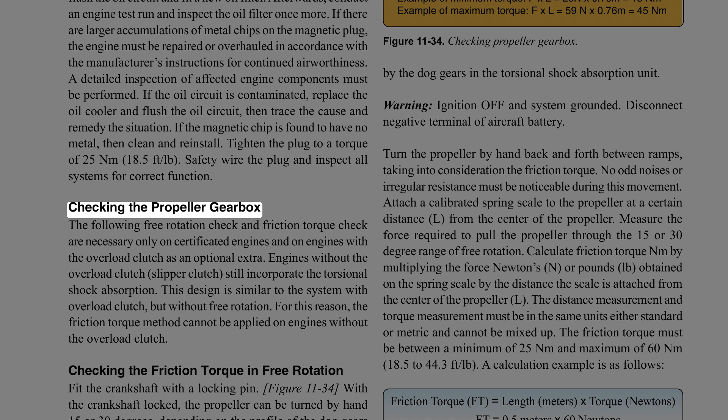Checking the propeller gearbox. The following free rotation check and friction torque check are necessary only on certificated engines and on engines with the overload clutch as an optional extra. Engines without the overload clutch, slipper clutch,

still incorporate the torsional shock absorption. This design is similar to the system with overload clutch, but without free rotation. For this reason, the friction torque method cannot be applied on engines without the overload clutch.

Checking the friction torque in free rotation. Fit the crankshaft with a locking pin. With the crankshaft locked, the propeller can be turned by hand 15 or 30 degrees, depending on the profile of the dog gears installed. This is the maximum amount of movement allowed by the dog gears in the torsional shock absorption unit. Warning: ignition off and system grounded.

Disconnect negative terminal of aircraft battery. Turn the propeller by hand back and forth between ramps, taking into consideration the friction torque. No odd noises or irregular resistance must be noticeable during this movement.

Attach a calibrated spring scale to the propeller at a certain distance, L, from the center of the propeller. Measure the force required to pull the propeller through the 15 or 30 degree range of free rotation. Calculate friction torque Nm by multiplying the force, newtons N or pounds lb, obtained on the spring scale by the distance the scale is attached from the center of the propeller, L.

The distance measurement and torque measurement must be in the same units, either standard or metric, and cannot be mixed up. The friction torque must be between a minimum of 25 Nm and maximum of 60 Nm, 18.5 to 44.3 feet per pound. A calculation example is as follows.

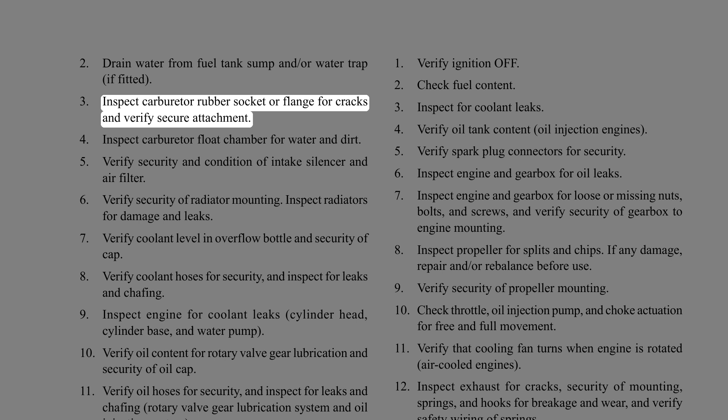Verify ignition off. Drain water from fuel tank sump and/or water trap, if fitted. Inspect carburetor rubber socket or flange for cracks and verify secure attachment. Inspect carburetor float chamber for water and dirt. Verify security and condition of intake silencer and air filter. Verify security of radiator mounting.

Inspect radiators for damage and leaks. Verify coolant level in overflow bottle and security of cap. Verify coolant hoses for security, and inspect for leaks and chafing. Inspect engine for coolant leaks at the cylinder head, cylinder base, and water pump.

Verify oil content for rotary valve gear lubrication and security of oil cap. Verify oil hoses for security, and inspect for leaks and chafing, rotary valve gear lubrication system and oil injection system. Verify ignition coils and electronic boxes for secure mounting, and check ignition leads and all electrical wiring for secure connections and chafing. Verify electric starter for secure mounting, and inspect cover for cracks.

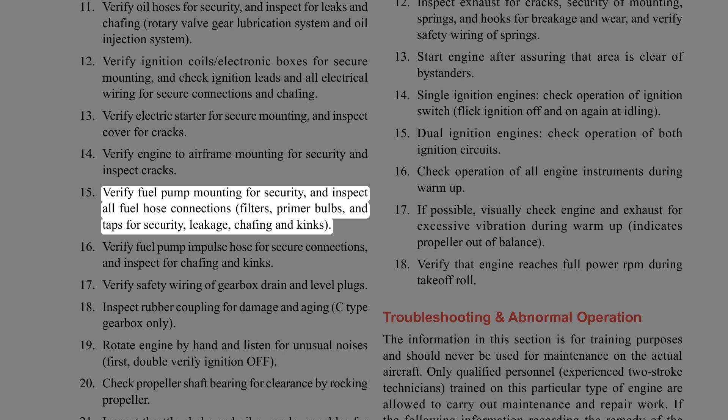Verify engine to airframe mounting for security and inspect for cracks. Verify fuel pump mounting for security, and inspect all fuel hose connections, filters, primer bulbs, and taps for security, leakage, chafing, and kinks. Verify fuel pump impulse hose for secure connections, and inspect for chafing and kinks.

Verify safety wiring of gearbox drain and level plugs. Inspect rubber coupling for damage and aging, C-type gearbox only. Rotate engine by hand and listen for unusual noises.

First, double verify ignition off. Check propeller shaft bearing for clearance by rocking propeller. Inspect throttle, choke, and oil pump lever cables for damage, end fittings, outer casing, and kinks.

Pre-flight checks. The following checklist should be performed for all pre-flight checks. Repair, as necessary, all discrepancies and shortcomings before flight. Verify ignition off. Check fuel content.

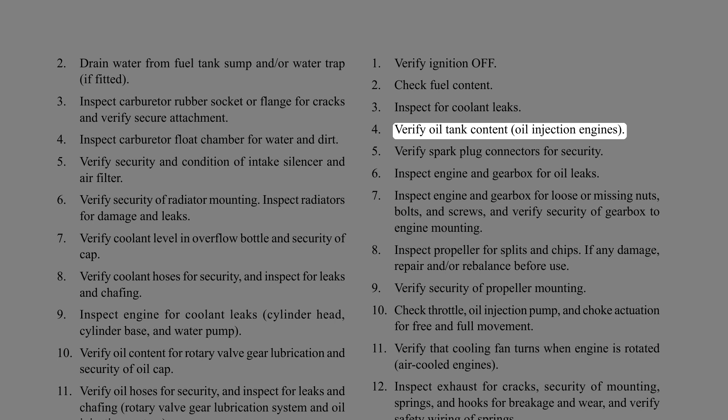Inspect for coolant leaks. Verify oil tank content on oil injection engines. Verify spark plug connectors for security. Inspect engine and gearbox for oil leaks. Inspect engine and gearbox for loose or missing nuts, bolts, and screws, and verify security of gearbox to engine mounting.

Inspect propeller for splits and chips. If any damage, repair and/or rebalance before use. Verify security of propeller mounting. Check throttle, oil injection pump, and choke actuation for free and full movement.

Verify that cooling fan turns when engine is rotated, air-cooled engines. Inspect exhaust for cracks, security of mounting, springs and hooks for breakage and wear, and verify safety wiring of springs. Start engine after assuring that the area is clear of bystanders.

Single ignition engines: check operation of ignition switch, flick ignition off and on again at idling. Dual ignition engines: check operation of both ignition circuits. Check operation of all engine instruments during warm-up. If possible, visually check engine and exhaust for excessive vibration during warm-up, which indicates propeller out of balance. Verify that engine reaches full power RPM during takeoff roll.

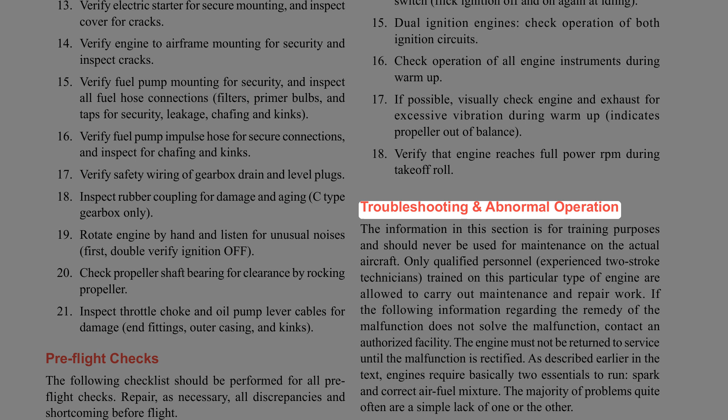Troubleshooting and abnormal operation. The information in this section is for training purposes and should never be used for maintenance on the actual aircraft. Only qualified personnel, experienced two-stroke technicians trained on this particular type of engine, are allowed to carry out maintenance and repair work. If the following information regarding the remedy of the malfunction does not solve the malfunction, contact an authorized facility. The engine must not be returned to service until the malfunction is rectified.

As described earlier in the text, engines require basically two essentials to run: spark and correct air-fuel mixture. The majority of problems quite often are a simple lack of one or the other. Troubleshooting: follow an organized method of troubleshooting. This facilitates the identification of discrepancies or malfunctions.

Fuel: start by checking the supply, tank, fittings for looseness, filter for plugging, and float chamber for fouling. Spark: check for spark at the spark plugs. Problems of a more complex nature are best left to an engine technician. The following are examples of engine troubles and potential fixes.

Engine keeps running with ignition off. Possible cause: overheating of engine. Remedy: let engine cool down, idling at approximately 2000 engine RPM.

Knocking under load. Possible cause: octane rating of fuel too low. Remedy: use fuel with higher octane rating. Possible cause: fuel starvation, lean mixture. Remedy: check fuel supply.

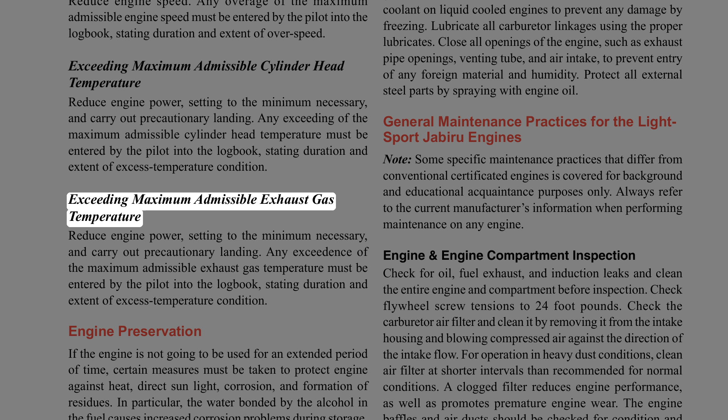Exceeding maximum admissible cylinder head temperature: reduce engine power, setting to the minimum necessary, and carry out a precautionary landing. Any exceeding of the maximum admissible cylinder head temperature must be entered by the pilot into the logbook, stating duration and extent of the excess temperature condition. Exceeding maximum admissible exhaust gas temperature.

Two methods can be used to check cylinder compression. The compression gauge method measures compression using a compression tester. Readings are taken with a fully open throttle valve at engine oil temperature between 30 and 70 degrees Celsius, 90 to 160 degrees Fahrenheit. If readings are below 6 bars, 90 psi, a check of the pistons, cylinders, valves, and cylinder heads must be undertaken.

The second method uses the pressure differential test. Check cylinder compression for a maximum allowable pressure loss of 25%. As an alternative to a compression test, a pressure differential test, or leak down test, can be accomplished.

This is a much better test of the condition of rings, bore, head sealing, and valves. This is the normal test used in aviation and requires specific equipment. The test is carried out with the engine in warm to hot condition.

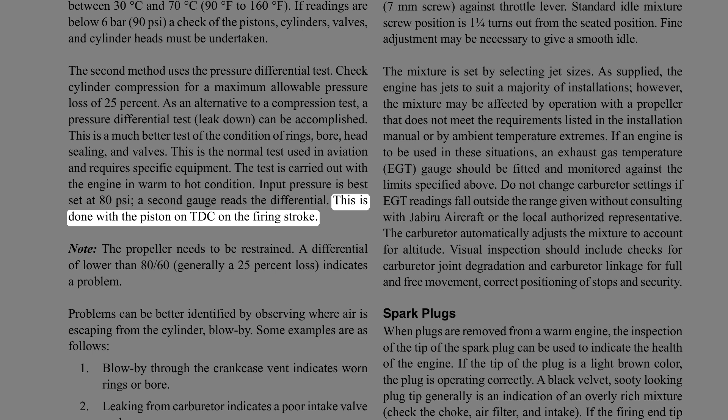Input pressure is best set at 80 psi. A second gauge reads the differential. This is done with the piston on TDC on the firing stroke. Note: the propeller needs to be restrained.

A differential of lower than 80/60, generally a 25% loss, indicates a problem. Problems can be better identified by observing where air is escaping from the cylinder, blow-by. Some examples are as follows.

Blow-by through the crankcase vent indicates worn rings or bore. Leaking from carburetor indicates a poor intake valve seal. Leaking from exhaust indicates a poor exhaust valve seal. Head leak indicates poor head to cylinder seal.

With the problem identified, the malfunction can then be corrected. Poor compression can be an indication of a serious problem. For example, continued operation with poor compression due to a poorly sealing valve can lead to eventual valve failure and heavy damage to the piston, connecting rod, barrel, and head.

Lubrication system. The oil should be changed as required by the manufacturer. When changed, the oil filter should also be changed. Change the oil filter at every 50 hourly inspection. Drain the oil while the engine is still warm and visually check for leaks.

Fill the engine with oil, approximately 2.3 liters, and check oil level. Never exceed the maximum mark. Use only registered brand oils meeting the correct specifications.

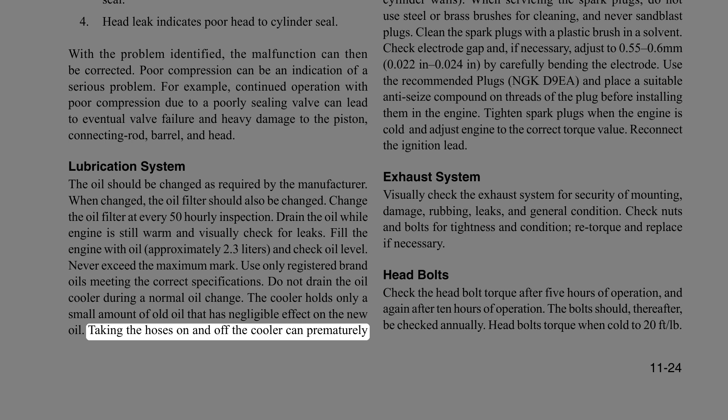Do not drain the oil cooler during a normal oil change. The cooler holds only a small amount of old oil that has negligible effect on the new oil. Taking the hoses on and off the cooler can prematurely age the oil lines and lead to hoses slipping off the cooler. Carburetor adjustment and checks.

To adjust the engine's idle speed, adjust the idle stop screw, a 7 mm screw, against the throttle lever. Standard idle mixture screw position is 1 and 1/4 turns out from the seated position. Fine adjustment may be necessary to give a smooth idle.

The mixture is set by selecting jet sizes. As supplied, the engine has jets to suit a majority of installations. However, the mixture may be affected by operation with a propeller that does not meet the requirements listed in the installation manual or by ambient temperature extremes.

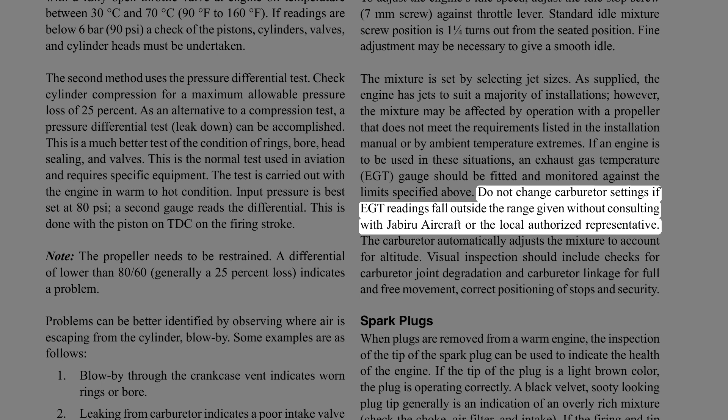If an engine is to be used in these situations, an exhaust gas temperature (EGT) gauge should be fitted and monitored against the limits specified above. Do not change carburetor settings if EGT readings fall outside the given range without consulting Jabiru aircraft or the local authorized representative. The carburetor automatically adjusts the mixture to account for altitude.

Visual inspection should include checks for carburetor joint degradation and carburetor linkage for full and free movement, correct positioning of stops, and security. Spark plugs.

When plugs are removed from a warm engine, the inspection of the tip of the spark plug can be used to indicate the health of the engine. If the tip of the plug is a light brown color, the plug is operating correctly. A black velvet, sooty-looking plug tip generally is an indication of an overly rich mixture.

Check the choke, air filter, and intake. If the firing end tip is covered with oil, it is an indication of too much oil in the combustion chamber. Check for worn piston rings and cylinder walls.

When servicing the spark plugs, do not use steel or brass brushes for cleaning, and never sandblast plugs. Clean the spark plugs with a plastic brush and a solvent.

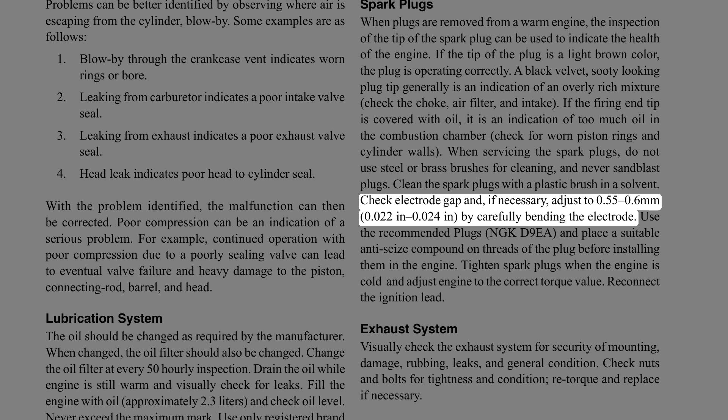Check electrode gap and, if necessary, adjust to 0.55 to 0.6 mm (0.022 to 0.024 in) by carefully bending the electrode. Use the recommended plugs, NGK D9EA, and place a suitable anti-seize compound on the threads of the plug before installing them in the engine. Tighten spark plugs when the engine is cold and adjust to the correct torque value.

Reconnect the ignition lead. Exhaust system: visually check the exhaust system for security of mounting, damage, rubbing, leaks, and general condition. Check nuts and bolts for tightness and condition. Re-torque and replace if necessary.

Head bolts. Check the head bolt torque after 5 hours of operation, and again after 10 hours of operation. The bolts should, thereafter, be checked annually. Head bolts torque when cold to 20 foot-pounds.

Tachometer and sender. Many apparent engine problems can be caused through inaccurate tachometers. Where engine performance is observed to be outside limits, the tachometer should be checked against a calibrated instrument. Tachometer sender gap is 0.4 mm (0.016 inches).

The sender must have at least 60% covered by the tags fitted to the gearbox side of the flywheel. Ensure both tags are equal distance from the sender. Engine inspection charts: read all inspection requirement paragraphs prior to using these charts.